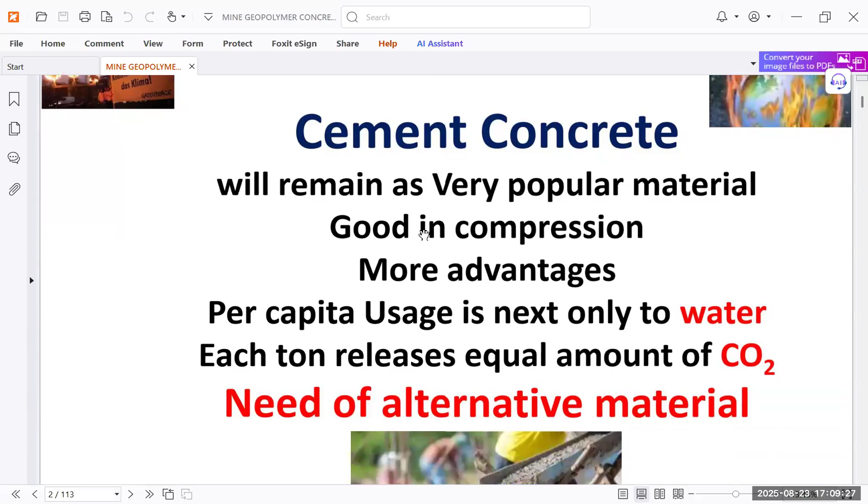You can see the CO2 amount being released is very high in this usage. After China, India is the second largest CO2 emitter during cement concrete production.

So that is the reason an alternative material is needed, because CO2 is not good for our environment. This research is going on to compensate by reducing the use of environmental sources so that we make less emission of CO2. That is the purpose of this research.

Portland cement is commonly used in this. It is most energy intensive and consumes 4 gigajoules per ton of energy, and its major ingredients go into concrete, and it has less shelf life.

That is why we are going to cementitious materials, because cement production generates a lot of CO2. That is why we are moving towards cementitious materials.

Some materials already known to have cementitious properties include industrial waste, among others. Disposing of waste is also an issue nowadays because it is not easily disposable, so its disposal is a challenge. That is why it is important to consider waste during the construction process, so that the disposal issue is solved.

We can use the industrial waste, and that is why it is important. We should focus on how we can use industrial waste and how we can combat the challenge of emitting large amounts of CO2.

These are the important things. That is the reason why we are going for this research work, and this is the requirement of the time: industrial waste should be properly disposed of, so that the disposal problem is solved and their use is also there.

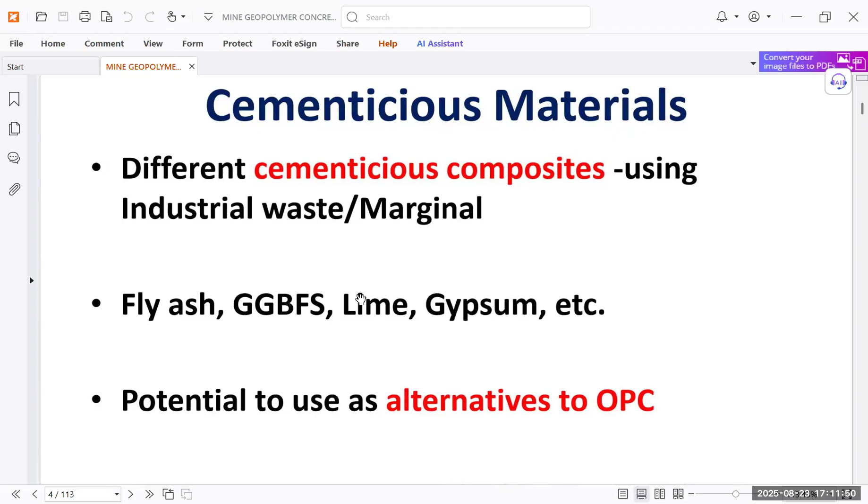That is why we are now moving to alternatives to OPC. OPC is still widely used, but we are coming to alternatives so that our CO2 release is less, and there is also one more thing we have to move towards: the potential use of alternatives to OPC.

We are using that in construction. The best way to dispose of it is that we should use OPC cement partly, but also other cementitious materials, so that the disposal problem is solved and the CO2 emission problem is also solved.

That is the reason CO2 footprints, carbon footprints, need to be reduced as per our government's agenda and as per the agenda for our environment. This topic is more applicable nowadays because it is a concern not only for nature but also for the waste disposal problem.

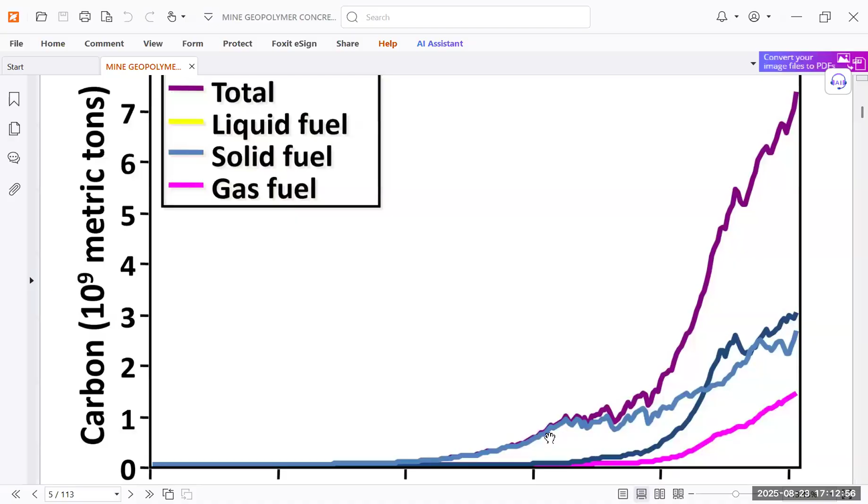You can see there are worldwide carbon emissions, shown as carbon in units of 10 to power 9 metric tons. The total is shown in this graph, along with liquid fuel, solid fuel and gas fuel as different sources of carbon emission, shown year-wise. So we can see the carbon emission is very high due to these emissions.

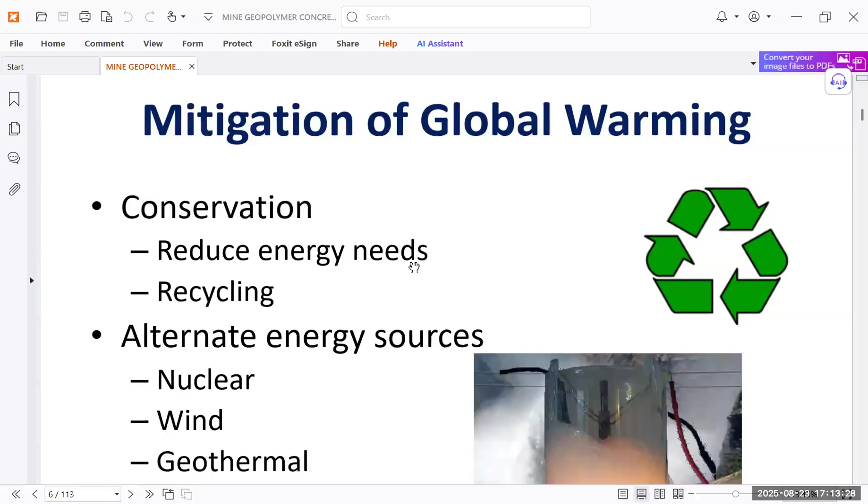So mitigation of global warming is required because the environment is depleting day by day. Conservation is required, and we also have to reduce energy needs and focus on recycling. Earlier we were just going for a one-way cycle; nowadays it is recycling, meaning whatever we use should be recycled rather than disposed of. That is also one main concern, so conservation is one part of why we are focusing on it.

So that energy power is reduced and recycling is there. Earlier, recycling was not there because we were using it and just wasting it and disposing it in waste. Nowadays, its recycling part is also important.

That is why conservation is one thing, and alternative energy sources from which we can produce nuclear also, wind also, geothermal also, hydroelectric also, solar also, fusion also. These are the alternative energy sources by which we can make use of that, so that our CO2 emission part is less and we can use this also as a part of our construction work.

So how is it possible in the construction industry? Because construction industry is a very big industry, and nowadays government is highly focused on the construction industry part. Things are becoming more challenging nowadays because of CO2. If you go for construction, cement is a very essential part, and we have to produce more to meet the requirements of the construction industry.

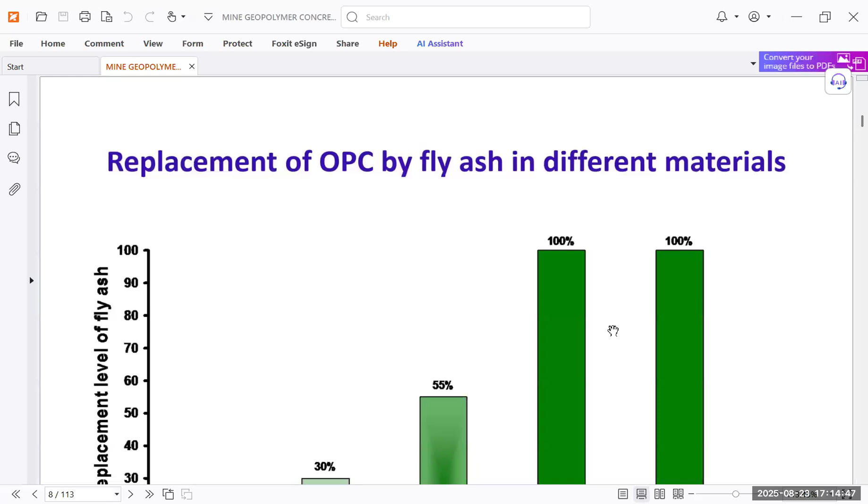That is why we have to focus on this. So that is the reason we are here, to see how these things can be solved by geopolymer concrete. Replacement of OPC by fly ash - already we have seen these different cementitious blends, and this is a normal percent level of the fly ash.

If we use this fly ash percentage, OPC is 0, so then it is required. This means we can say that by this percentage, geopolymer is 100% - 100% replacement is there by geopolymer. So with geopolymer, we can use 100% replacement.

You can see the OPC, there is normal blended cement - not used. We are replacing by 30%, high volume fly ash concrete 55%, FPLG by 100%, and geopolymer also 100%. So we want to replace this CO2 emission part 100% by using geopolymer concrete.

So we should know what is geopolymer. It is activation of natural materials like clay, etc. Geo means it is available in Earth's crust, and polymerization means cementing materials.

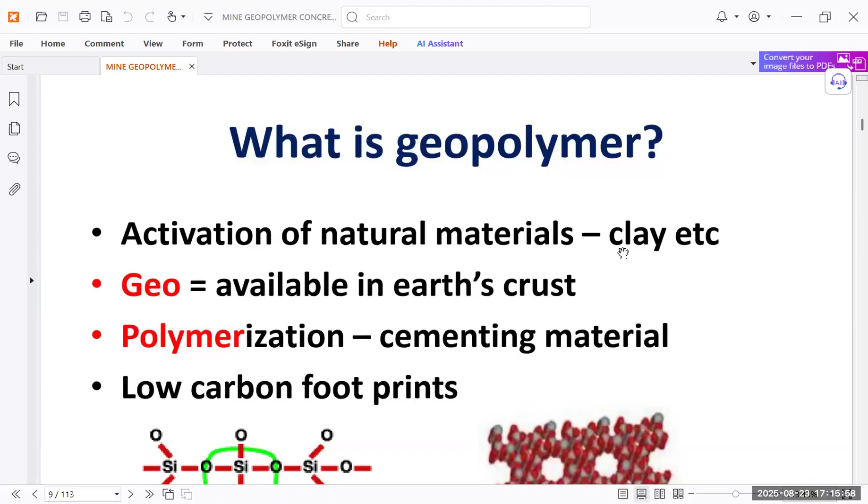So you can see that cement is replaced. Now OPC is not there, and we are using polymerization by using cementing materials. This is why we are going for geopolymer - because it's activation of natural materials like clay, etc., and it is available in the Earth's crust.

That is why it is called geo. And polymerization means cementing materials, with low carbon footprint there. As we are replacing this OPC part, its carbon footprint is less. So you can see the use, essence and importance of this.

The geopolymer concrete is replacing the OPC part. That is why it is also causing less pollution by using cementing materials. So that is why our cement requirement is less.

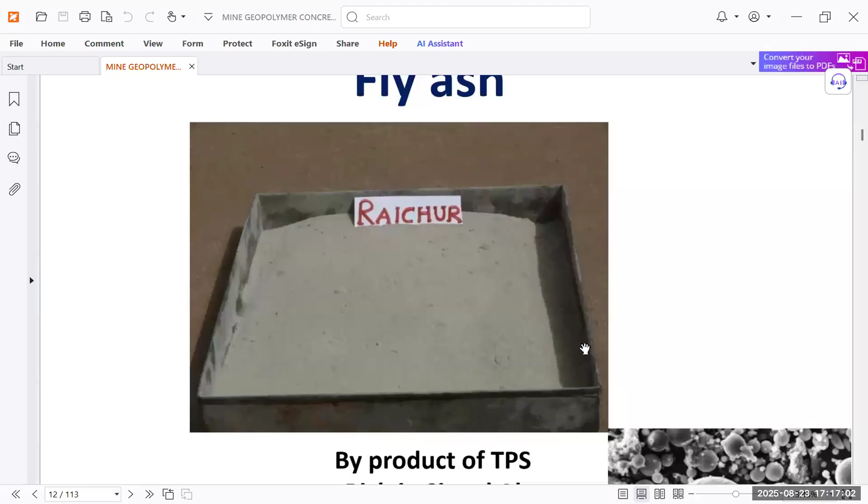These are the parts like cement and fly ash which are nowadays also used in this. Fly ash, as we know, is a by-product of TPS, rich in silica and aluminum, finer than cement, spherical in shape. So this is also one part of this cement.

ASTM classification of fly ash: Class F has calcium less than 5%, it is anthracite coal and not self-cementitious, very common across the world. Class C has calcium greater than 15%, lignite coal, and is self-cementitious, with a lot of commercial value in this C part.

So fly ash, some idea we will have. Before going into geopolymer concrete, we should see that some guidance documents are also there. Fly ash quality assurance by ACI 229R for controlled low strength material. ASTM C311 for sampling and testing fly ash or natural pozzolans for use in Portland cement concrete, given by ASTM. And ASTM C593 is for fly ash and other pozzolans for use with lime.

Which I am showing are the current practices. After that, we'll see what changes will be there after the geopolymer complete industrial cycle.

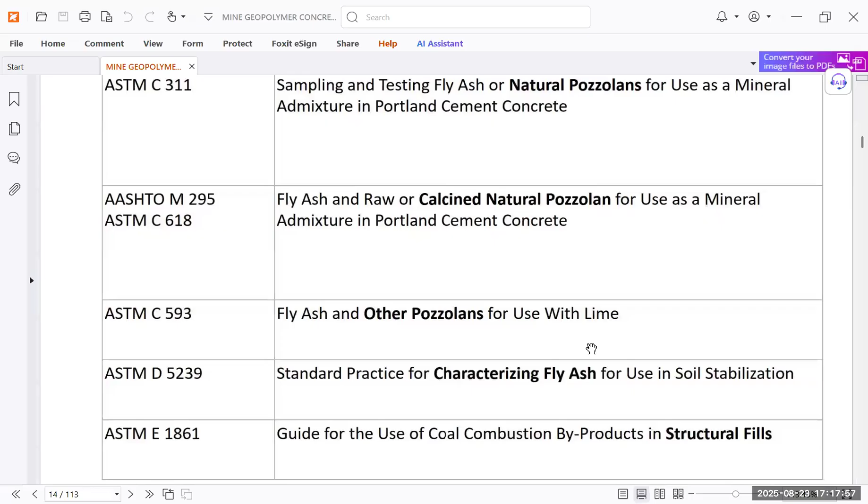There are guidelines for use of coal combustion byproducts in structural fills. This is the slag, also one alternative synthetic material which we go for. And this is GGBS, the waste from the ferrous industry which is quenched ground granulate, rich in silica, aluminum, and calcium. This is also one part of the things going on nowadays.

Metakaolin is also one part we are using, which is burnt clay at high temperatures, highly reactive. It contains silica and can replace cement, but it is not economical.

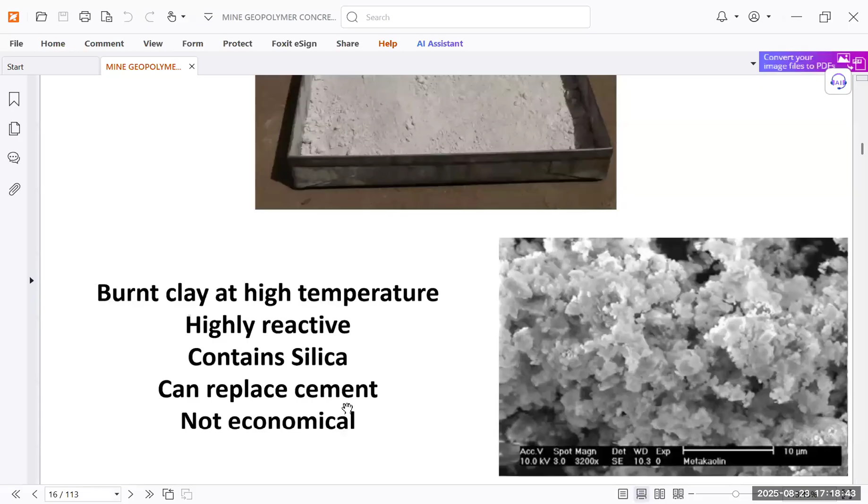We are showing currently what cementitious things we are using, but after that, geopolymer is also not very much costly and it is replacing in a more effective way. These are the current practices going on nowadays.

Silica fume is also used in construction. It has greater than 90% silica, is finer than fly ash, with 1 micron size. Its condensed form can also replace cement.

So these are all the things we already know with similar use. Now let us go for what is the ingredients of the geopolymer concrete.

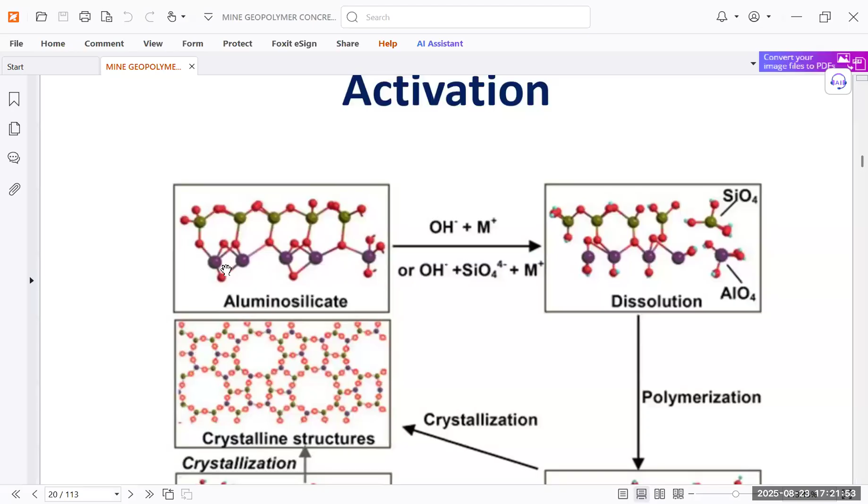Earlier there were cement properties, but now it is geopolymeric reactions, something like this: polymerization occurs, oligomers are made, crystallization occurs and crystalline structures are made, polymerization continues, then amorphous polymers are made. This is the way.

So then why is water used here? Because in OPC cement, we use a water and cement mixture, and exothermic reactions go on. But water is still used here in geopolymer. Water here is used from the alkaline solution, it is used for making the alkaline solution, and it is released during geopolymerization, not used for curing.

So you can see geopolymer concrete is not only reducing the cement content, but also reducing the use of water, because curing is a very important part, as we already know. But in this, water is not used for curing, it is used just to make alkaline solution, and it is released during geopolymerization.

So that is the need of the time. Water should be less, and curing should be less, because water is very less, especially in Delhi. It is an important consideration in some regions where, all over India, water is going down and getting polluted. So water requirement is also reduced, and cement requirement is also reduced. That is the reason this research on geopolymer concrete is getting focus.

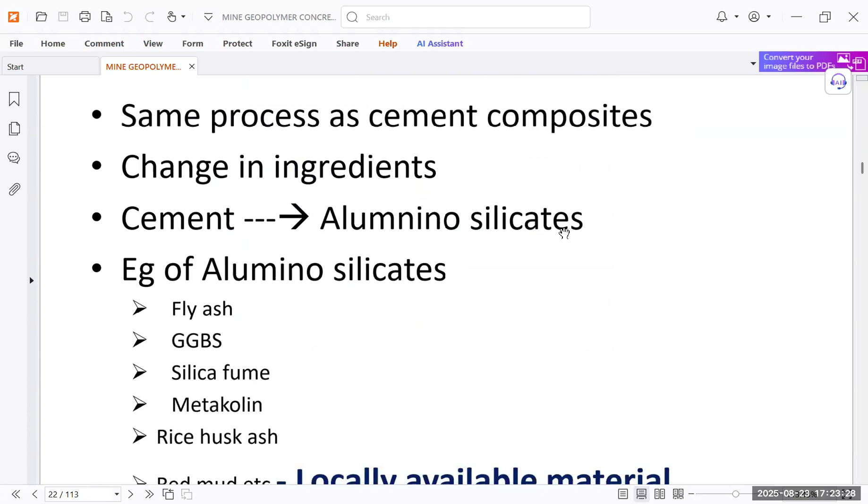Now, how is the making of geopolymer done? Its making is same as cement composites, but the change is in the ingredients. Cement is changed to alumino silicates. Examples of alumino silicates are fly ash, GGBS, silica fume, metakaolin, rice husk ash, and red mud, etc., which are locally available materials. In making geopolymer, we use the same aggregate, and water is used for alkali solution.

We make an 8 to 14 molarity solution. Water is used to make the alkaline solution of 8 to 14 molarity. Sodium hydroxide and sodium silicate are used, and potassium hydroxide and potassium silicate are also used. Then what reaction goes on? Sodium salts plus water are mixed to make the alkaline solution. This is how the reaction goes on in making the geopolymer.

So aggregates are same, but water here is not used for curing purpose. It is used for the alkaline solution, in which we make an 8 to 14 molarity solution. That is why geopolymer is not related only to civil engineers, it is also related to chemistry people, because it involves chemical reactions.

Involving these reactions means we have to do some chemistry too. That is why geopolymer work is also done by chemistry people. Many chemistry people are working in this field, so its availability and understanding is more, because making molar solutions and other things should be done as per requirement. So you can see many chemistry people are also working in this geopolymer concrete, not only civil people, because of these reactions.

After this reaction is done, the process of making is: sodium hydroxide and sodium silicate are there, and from the coal-fired power plant we mix sodium hydroxide and sodium silicate solution to make a highly alkaline solution. From the coal-fired power plant, we get the source material, and we use the aggregates as well.

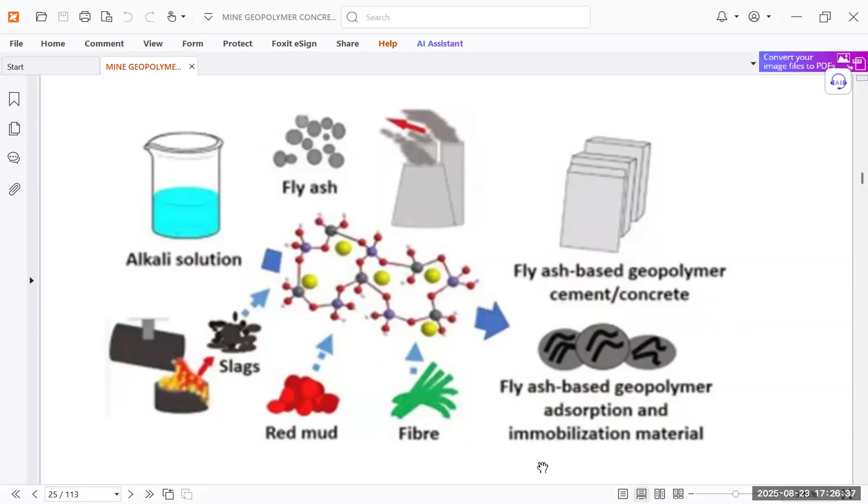You can see that alkali solution is made, the ash we will use, then this geopolymerization occurs, and slags we will use also. Red mud and fiber we will use, and then fly ash based geopolymer cement concrete is made, and fly ash based geopolymer adsorption and immobilization material can be done. After making this, we can use it for different uses in building and other parts. Whatever RCC was used previously, we can similarly use geopolymer concrete.

So this tank is there, as we know, different fly ash is there. When fly ash class F is there, geopolymerization occurs at elevated temperature of 60 degrees Celsius. When GGBS is used, hydration occurs and thermal energy is not required. And if we use fly ash plus GGBS, then geopolymerization plus hydration is there, and thermal energy also is not required.

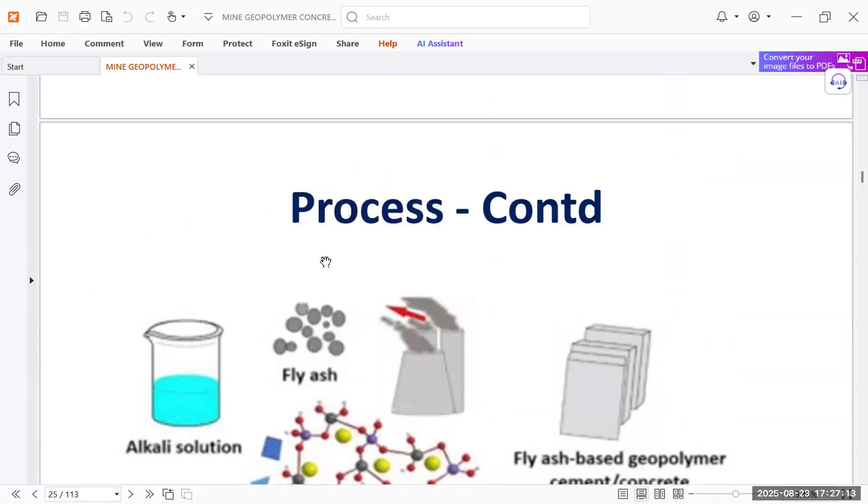As per this, whatever product and extra product we are using, the coal fired power plant is the source material, but this source material is changing to fly ash class F. If the source material is GGBS, thermal energy is not required. If we are using source material fly ash class F, then at elevated temperature such geopolymerization occurs. And when we use source materials fly ash plus GGBS, then geopolymerization plus hydration is there, and thermal energy is not required in that case.

So these are the parts of this geopolymer concrete, we have to make some solutions. What molarity we are making of the solution, that we know molar solutions are there - that's very important. Molarity in this case, the concentration of alkaline solution we have to see. For NaOH, it will be 40 gram per mole, and 1 liter of water plus 40 gram of NaOH is one molarity. This is the definition of one molarity. So that is why chemistry, in which we have read all about what is molar solution, what is molarity, that also comes into picture.

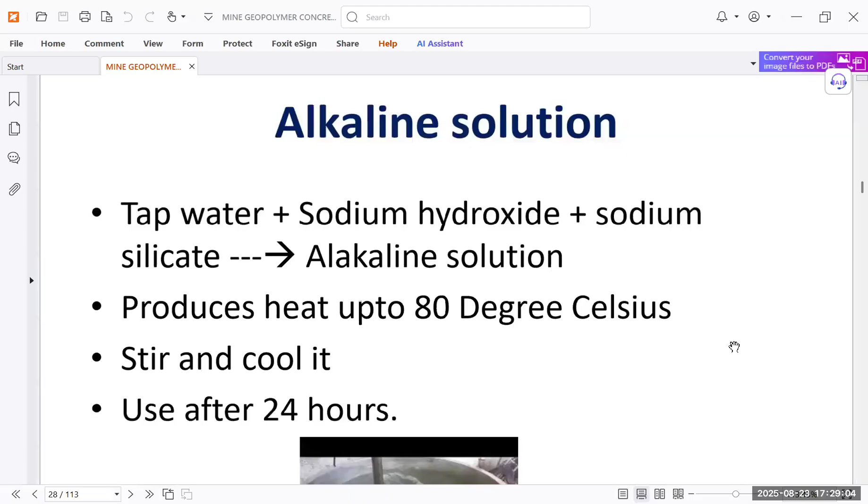To make this alkaline solution, you will use tap water plus sodium hydroxide, because you can see this alkaline solution we are using here. This alkaline solution we are making in the lab. That is why I am showing you how this alkaline solution is made - the molar reactions and other parts - so that alkaline solution making is seen in the lab. You can see this alkaline solution.

So that's why alkaline solutions we are making in the lab. Tap water will be used with sodium hydroxide plus sodium silicate that has been formed here. Sodium silicate has been formed here. Then we will make this alkaline solution, and then we will heat it up to 80 degrees Celsius. Then we will stir it and cool it, and we will use it after 24 hours. This is the way this alkaline solution is made by using tap water plus sodium hydroxide plus sodium silicate - heat up to 80 degrees Celsius, stir it, cool it, and use it after 24 hours.

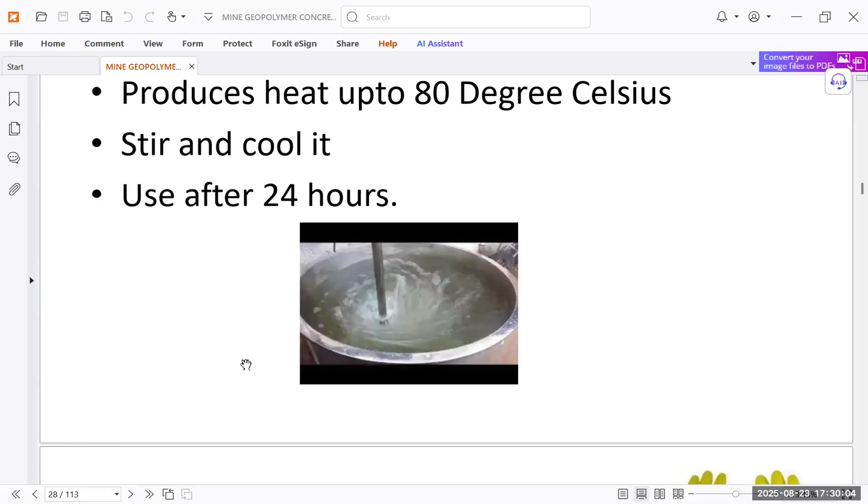But as you know, these are chemistry labs - I think everyone has worked in a chemistry lab. There must be precautions because we are using chemicals. That is why we should have precautions. The solution is highly alkaline plus hot at early hours, and it is not to be touched with bare hands - gloves should be used. So this geopolymer concrete requires some expertise also. It means not every layman can do it.

That is why some background should be there, not to touch with bare hands. Use protective measures, as we know in chemistry lab some protective measures should be taken care of. If it falls on skin, then loss of skin is also there, and it takes long time for healing if something occurs. So avoid falling of solution on skin, ear, and eye, etc. These are the precautions when we are making this lab.

That is why I told you, because chemistry people already work there. So those safety precautions we take in chemistry lab, same here also took in place.

Highly alkaline plus hot at early hours it is there, so that is why not to touch with bare hands. Use protective measures. If it falls on skin, loss of skin can also be there, and takes long time for healing. Avoid falling of solution on skin, ear, and eye, etc. These are the precautions we have to make using this molar solution.

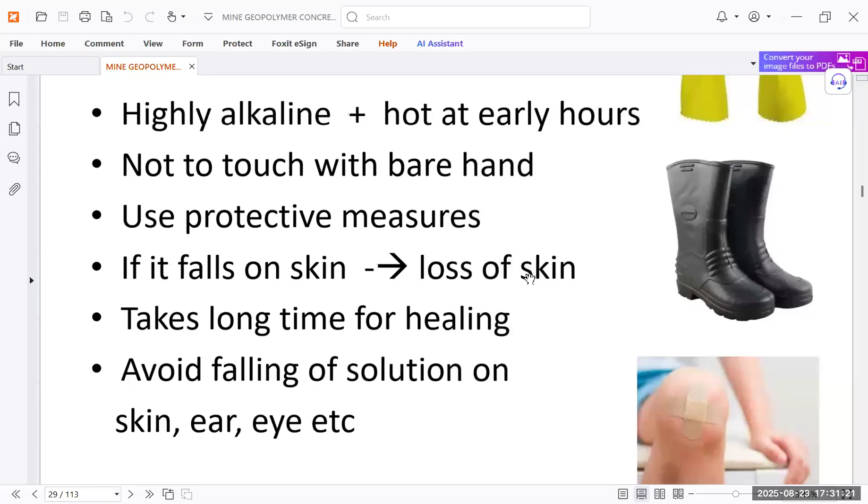If it is there, then we have to immediately splash jet of water on the affected area continuously, and irritation stops in minutes. If problem persists, then we have to consult doctor. And many researchers hide this information.

Because geopolymer concrete we are working on, we should know that these issues can also be there if we are not taking precaution. That is why we have to be cautious while making this. If eye problem is there, then we have to immediately wash the eye with clear water, consult doctor, and do not delay. These are the precautions because it concerns our health.

This also we should know, that with geopolymer concrete these parts will also be there. We should be ready for this, and whatever things are required for precaution we have to take care of, we can use protective glasses also.

There are some challenges also, as you know the geopolymer concrete code is not there. Like IS 456 code is there, but for geopolymer it is not there. Maybe we are in the process of making the draft of that code, but still it is not there. So there are some challenges also.

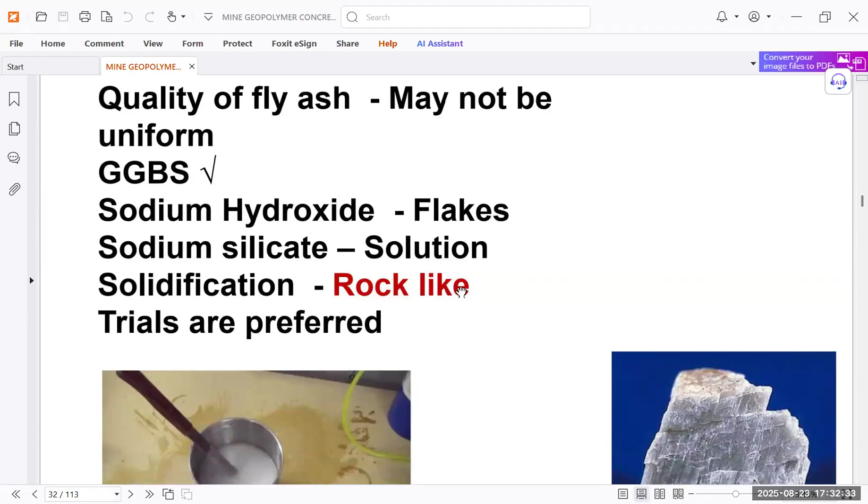What is the quality of fly ash where you are using, that may not be uniform, and GGBS also, and sodium hydroxide - some may be having flakes - and sodium silicate solution that we have to make properly. Solidification also rock-like occurs, and trials are preferred.

These are the challenges we have to see: quality of fly ash may not be uniform, GGBS and sodium hydroxide flakes are there, sodium silicate solution making is also a challenge, and solidification rock-like this is also there. Trials are preferred before finalizing the solution.

Geopolymers are something like this. When we make this, you can see Na2SiO3 plus NaOH solution there. This will be used to make alkaline solution, and fly ash also we will take from here. Alkaline solution plus fly ash we will mix, then we get the mix design, and fresh GPC will be made.

This fresh geopolymer concrete will be used for making cubes and reinforced GPC beams also. These are the ways by which we can produce geopolymer concrete, and we can use it in RCC beams also - these will be called reinforced GPC beams because we are using geopolymer concrete in them.

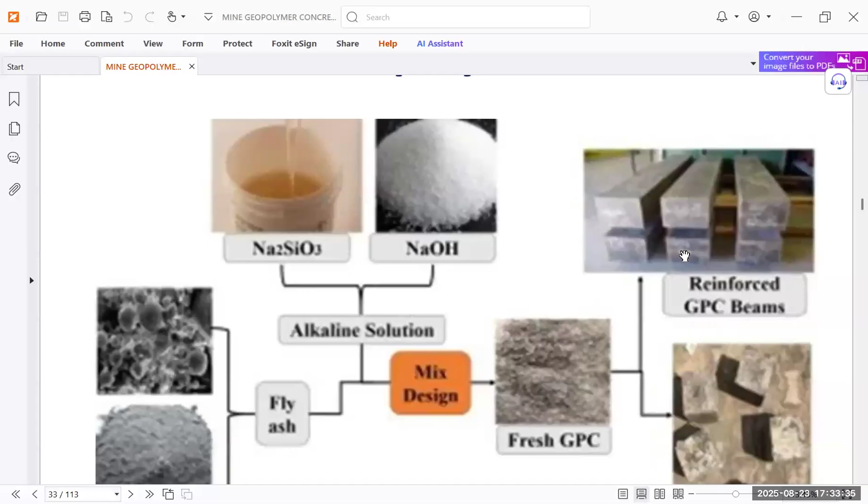Okay, and similarly geopolymer cubes are made here, something like this. These are the things by which we go for the geopolymer concrete.

So what about the water cement ratio? Here water cement is not used, instead of water we are using fluid. These are the changes we get in geopolymer concrete because water is not there. We are replacing water by fluid because we are making a solution, and cement we are replacing by binder. This is the change which we are doing.

So in geopolymer, cement is replaced by binder and water is replaced by fluid. Use of water is also less, and cement is replaced by binder, then cement is also not used here. That is the requirement of the day - CO2 production is very less, use of water is also very less during curing. That is the reason water cement ratio will be replaced here by fluid to binder ratio. That is the important thing.

Here water cement ratio will not be there because neither are we using pure water nor pure cement. So it will not be water cement ratio, it will be fluid binder ratio in this case.

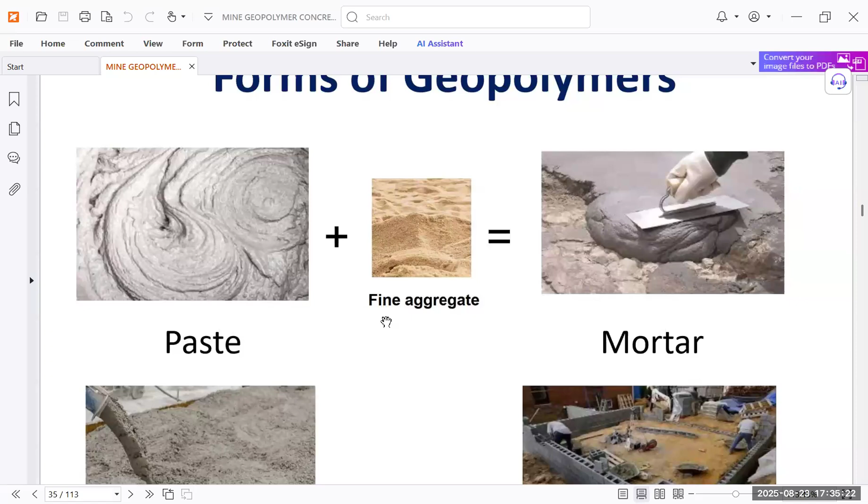These are the forms of the geopolymer. You can see the paste, then fine aggregates, then mortar is made, and concrete with machinery. This is what we are making using these forms of geopolymer. It can be made into any shape, similar to RCC, molded into any form. You can see cement paste, concrete, machinery, and mortar being made - these are the forms of geopolymer.

Geopolymer paste is made using fly ash plus GGBS, ground granulated blast furnace slag, as the source material, with alkaline solution. This makes the geopolymer paste. You can see cement is not there in this paste - that is missing here. That is the change we have made in geopolymer concrete, so our CO2 requirement is less and carbon footprint is less. That is there in this geopolymer concrete paste.

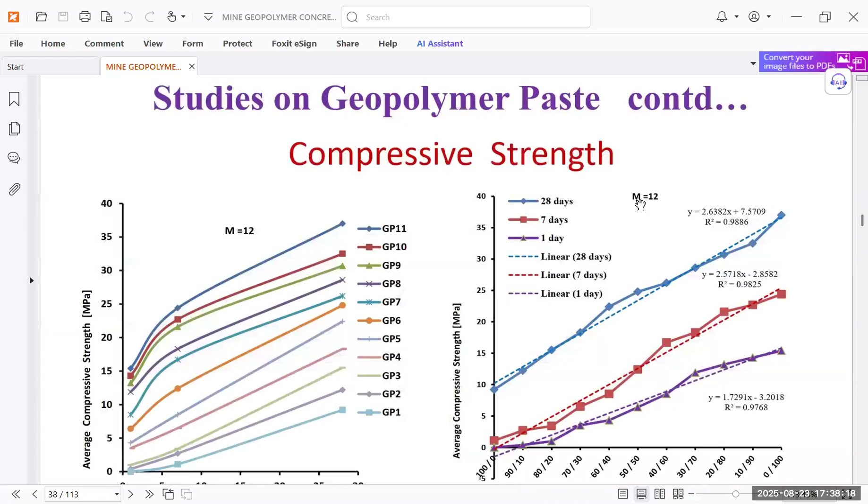Studies on geopolymer concrete paste have been done. You can see these graphs plotted for different geopolymer concrete GP1 to GP11, showing compressive strength. This is for molarity 12 throughout. As per age it progresses, and different colors show GP1 to GP11 - blue is for GP11, and another color for GP10, showing the average compressive strength at different ages.

For GP10, we used a 10 to 90 ratio - fly ash is 10% and GGBS is 90%. This GGBS waste is also used from those plants, which is also covered in this case. You can see how the strength changes with different molarity for different geopolymer concrete having different fly ash to GGBS ratios.

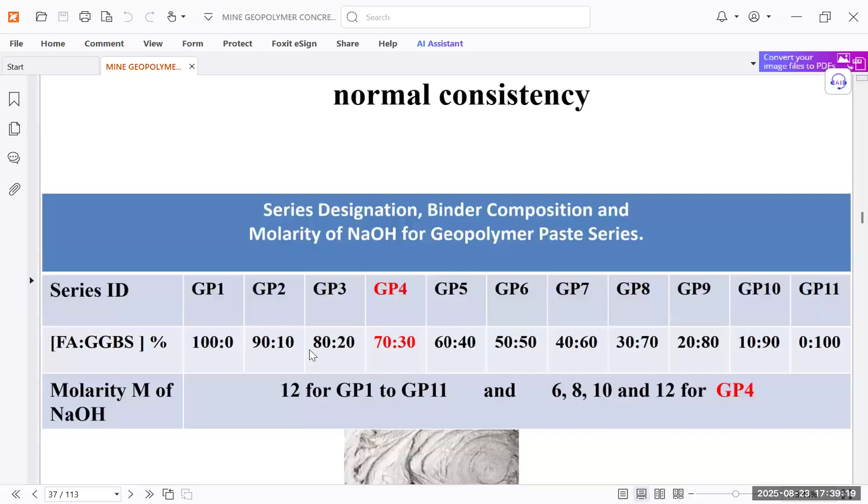As per the strength for different days, after 28 days strength, for this fixed molarity of 12, the change in the graph has been plotted, so we can achieve the required strength by controlling the mixed proportion ratios. As in the RCC case, here also we can get those strengths by adjusting the fly ash to GGBS ratio, so we have seen that we can achieve similar results using this geopolymer concrete.

In this case, microstructure views have been shown. The 3 day strength is 3.3 megapascal, and we have taken these pictures at the micro level. The 7 day strength is 6.4 megapascal, and after 28 days the strength is 20.4 megapascal. You can see how the strength progresses over different days, as in the case of RCC also.

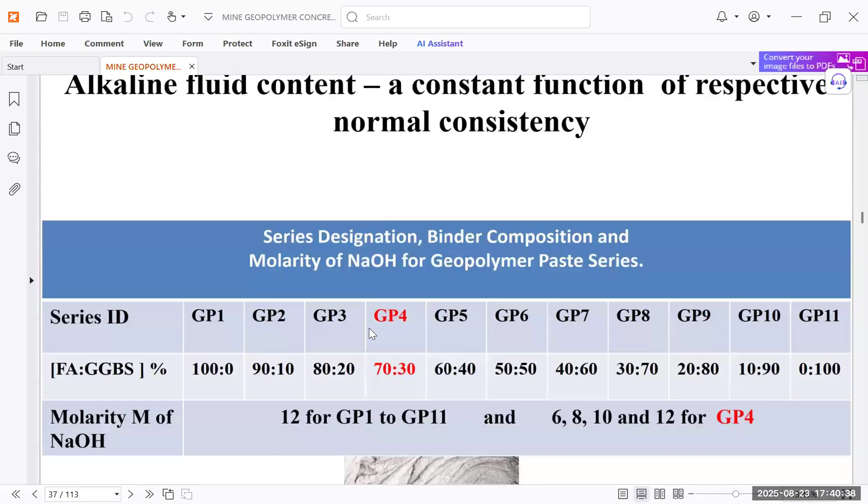So by this we can understand that geopolymer concrete also produces results similar to that of normal concrete using OPC. But here cement is not used, so CO2 production is less, which is why carbon footprints are less, while still achieving the desired strength through this ratio variation.

These are the research parts going on, evolution of microstructure with molarity for GP4. You can see the microstructure with molarity for GP4 for 7 days strength, with different molarities we have tried. For molarity 8, the strength is 4.8 megapascal. You can see the strength varying with molarity.

When fly ash to GGBS ratio is 70 to 30, same ratio, for 7 days strength, but with molarity the strength is changing. That is why we have changed the molarity also in this case. You can see 6, 8, 10, 12 for GP4, and 12 for GP1 to GP11. That is why molarity is also affecting the 3 days strength or 7 days strength.

By controlling the molarity also, we can get different strengths for the same number of days. That is also one part, so as per requirement we can mold different molarities. Whatever strength we want to achieve in 7 days, we can accordingly set the molarity - 6, 8, 10, or 12 - we have tried here.

You can see 7 days strength is 6.5 megapascal, for the same fly ash to GGBS ratio, 70 to 30 ratio. That is the reason why it is also moldable. Like in the previous case water cement ratio was changed, in this case molarity is changed so that we get the desired strength. These are the different research studies we have done.

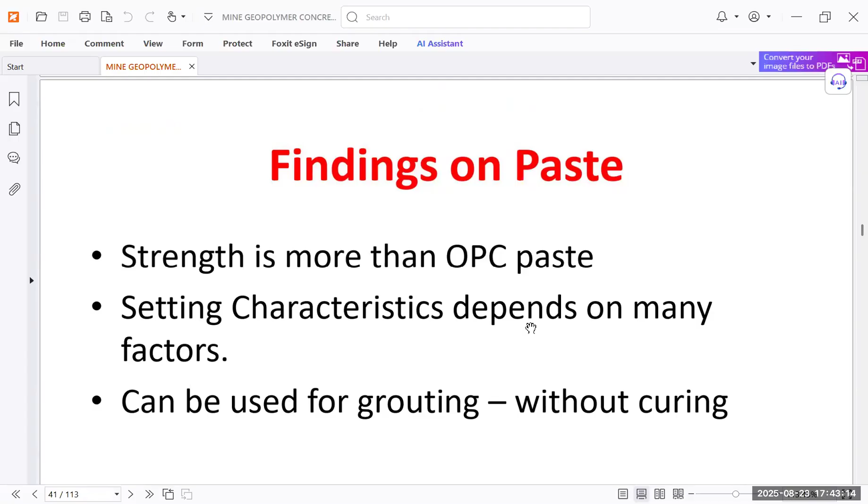For the 0.35 fluid-to-binder ratio, this is called the GMB series, and for 0.2 fluid-to-binder ratio, this is called the GMA series. The molarity M of sodium hydroxide is taken as 14. For this fixed molarity, we can see results for different fluid-to-binder ratios.

In this case, the binder composition is on a fly ash to GGBS basis: 100 to 0, then 90 to 10 - different binder compositions have been taken. Then we assigned series designations and mortar proportions.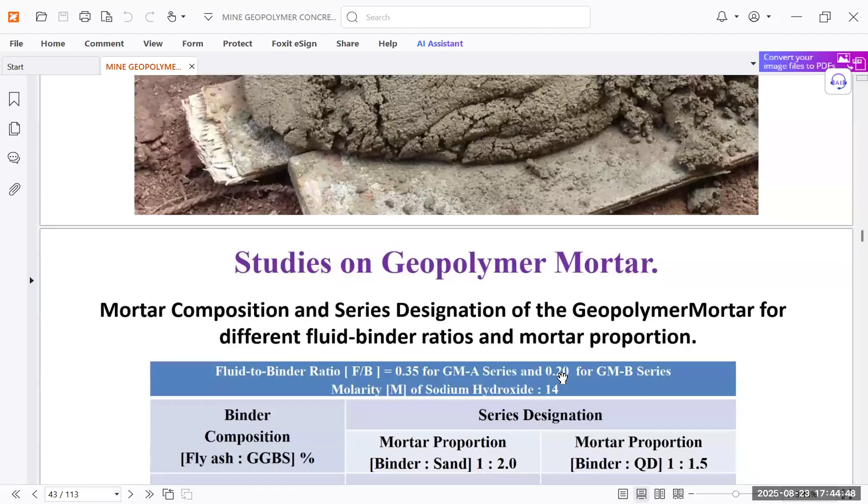So according to that, we have GMA1, GMA2, GMA3, GMA4, up to GMA11. The mortar proportion is 1 ratio to 1.5, and similarly GMB1, GMB2 are taken. The A series is for 0.35 fluid-to-binder ratio and B series is for 0.2 ratio. These are the different series for different binder ratios.

So in this case, we made some definitions and plotted our studies in this graph, studying the geopolymer mortar - the variation of strength with binder composition and age, at a constant flow of 75 plus minus 5%. This is the graph we obtained.

This shows 28 days, 14 days, and 7 days strength. You can see the series we have plotted from GM onward in this graph, showing how the ratio changes with compressive strength after 7, 14, and 28 days. This is how we obtain strength in the different geopolymer ratios.

These are the compositions we have taken - 100, 90, 70, 30, and others. By varying these ratios, we can get the different required strength, similar to different cases of an RCC mix. Geopolymer concrete can give the same type of different results as per the variation of binder-to-cement ratio and the fluid-to-binder ratio.

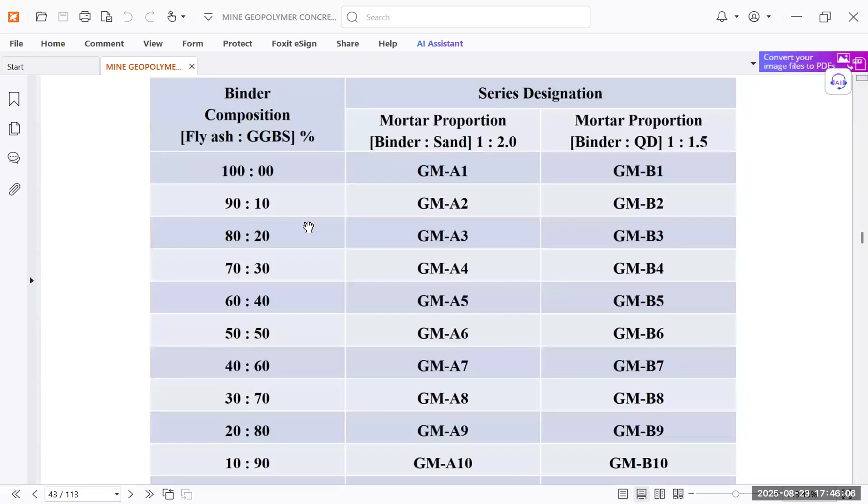I'm just showing how different strengths can also be obtained by varying the fly ash to GGBS ratio, varying the molarity, and varying the fluid-to-binder ratio. The same way, we can get results for geopolymer concrete and geopolymer mortar - this variation of strength with fly ash to GGBS ratio for different ages at different constant flows is obtained in this graph.

This shows that it is also applicable for the other parts. As per the requirement, we can vary the geopolymer mortar ratio to get the required strength.

Further graphs have been plotted for the variation of strength with molarity of NaOH. Now the molarity is changed - 6, 8, 10, 12, 14, 16, 18, 20 - and we can see this variation of strength with molarity.

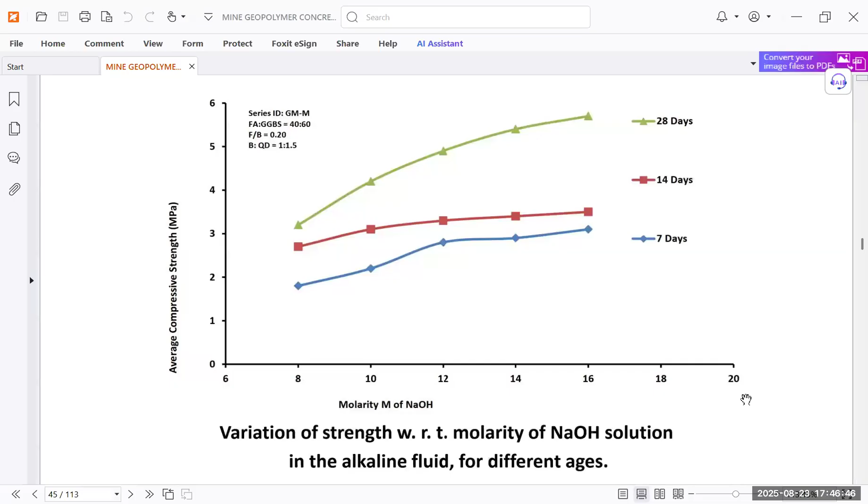As we already discussed in the previous case, molarity changes are shown here too - 12 molarity, 10 molarity, 8 molarity, 6 molarity. By changing the different molarity, we get different strength, and the same way we have plotted this graph.

This shows NaOH molarity plotted for 28 days, 14 days, and 7 days. For these different molarities, we have obtained this graph.

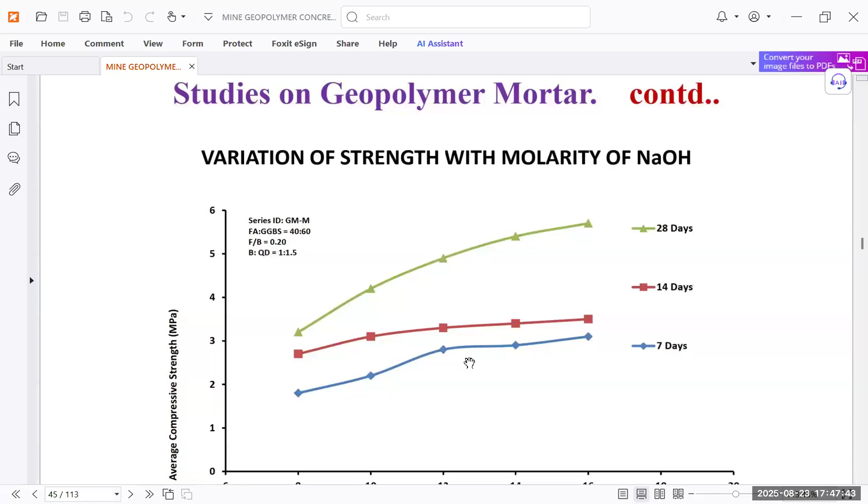Molarity is an important part, as per the requirement of how much strength we require in 28 days. This graph shows that molarity can be correlated with compressive strength - whatever compressive strength is required, by changing the molarity we can achieve it. Different molarities give different strengths for our geopolymer mortar.

Further studies on geopolymer mortar have been done. The variation of strength with mortar proportions has been shown. Mortar composition and series designation of GP mortar for different mortar proportions was carried out.

We made the fly ash to GGBS ratio 40 to 60, with molarity of NaOH at 14 and fluid to binder ratio at 0.4. Different mortar proportions were taken, with binder to QD ratio of 1:1 and 1:1.5, and series designation was carried out. This has also been plotted on a graph.

You can see this graph showing the results.

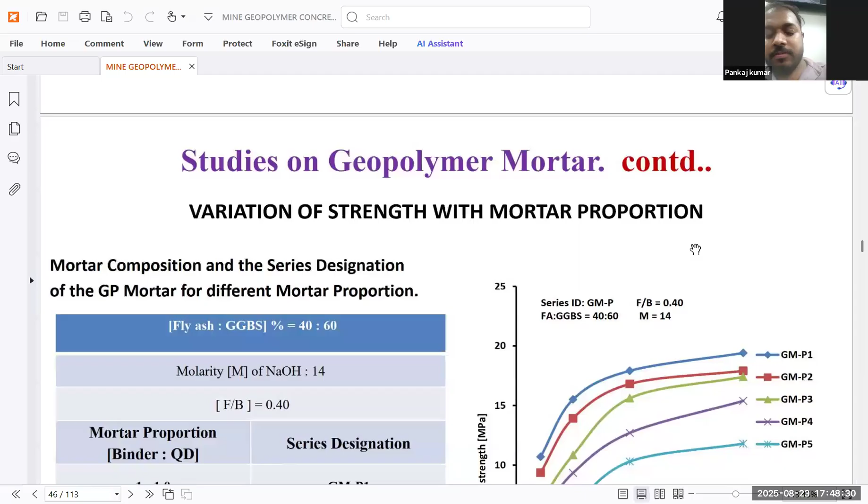After this, we see that molarity is fixed and fluid binder ratio is 0.4, so the average compressive strength is seen by varying the binder to QD ratio we have taken. We plotted this and obtained different strengths for different ages.

So this way, by using different compositions, we can get results similar to RCC concrete. Concrete-like results can be obtained by varying the molarity and varying the binder to fluid ratio. These are the factors by which we can get the required strength and results as in the case of concrete, without using cement.

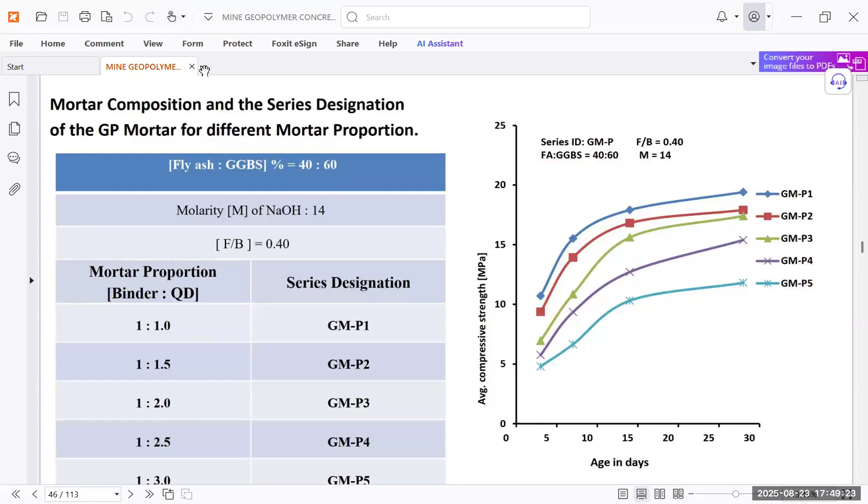That is the research area we are working on, getting results similar to conventional concrete in this geopolymer concrete by changing the molarity and the binder to fluid ratio. So we can get the desired results as in concrete, which is why it is very useful. Without using cement, we are getting those results.

In this case, W by C ratio is 0.3. Geopolymer blocks are manually made using a hydraulic press, with curing conditions done without water.

That is very important—we are doing curing without water. Water is not required. You can see that heat curing and ambient curing are both done without water. Geopolymer blocks are made manually using a hydraulic press, with heat curing or ambient curing.

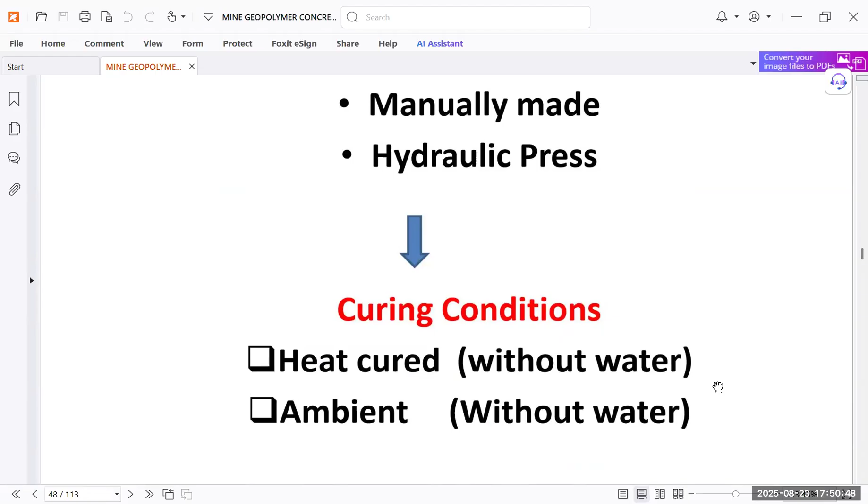In both cases, water is not used. So you can see that water is saved in the case of geopolymer blocks. No water is required during curing, which is why we are saving water and also getting the required results as in the case of concrete. That is why it is important.

That is an important part for the research—we are using different molarity, fluid to binder ratio, and we are not using water. Without curing with water, we are getting the results, which is why it is very important.

But these solutions are made in the lab, so special care is taken. It cannot be made by common persons, so expertise is required in making the required solution.

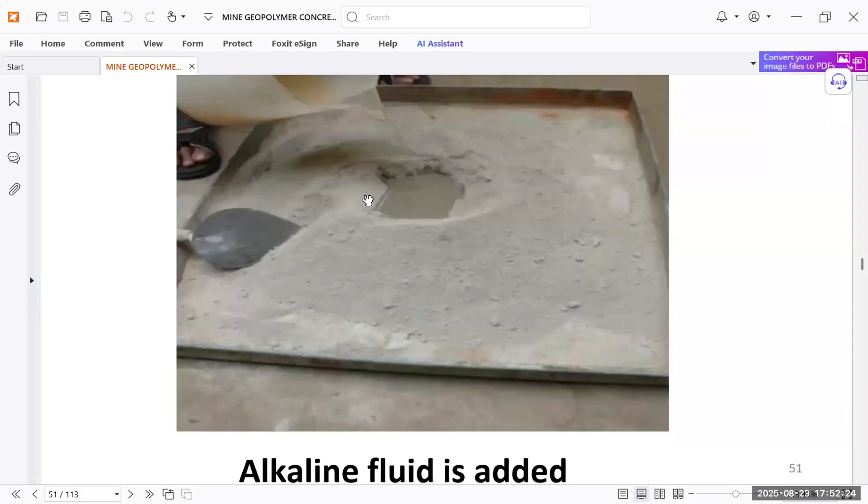Our desired strength is obtained by making proper molar solution, which is very important. So this alkaline fluid is added, not water. This alkaline fluid in the beaker is not water, which is important to know. You can see gloves are used here, not open-handed. We can use gloves because it is dealing with the solution, not water. That is why gloves are important in this case.

Let's see how it is made. Using gloves, we cannot go bare-handed because reactions can take place on your hand. That is why we are using gloves here, and mixing to get the homogeneous mix, as you can see. Again, the same process we are doing: we are weighing, making the required quantity of mortar, weighing in this figure.

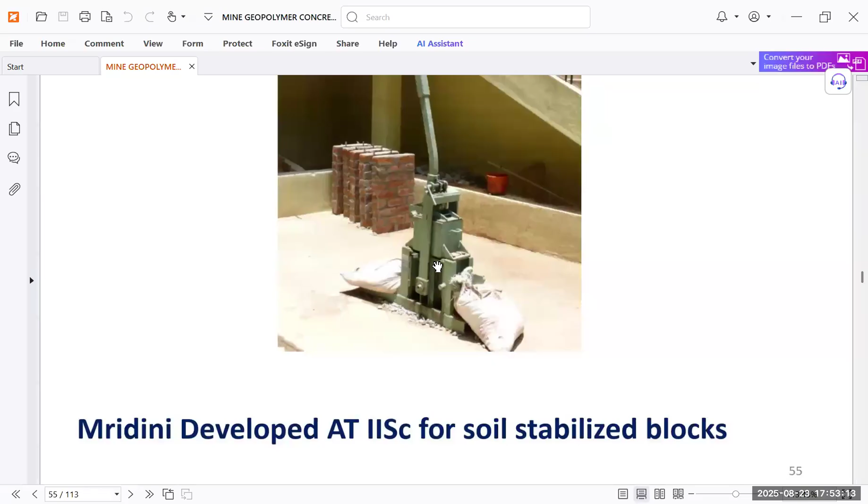Mridini developed at IISc for soil stabilized blocks. So this different maps has been made. At IISc Bangalore, this device has been made for geopolymer concrete. They have made some geopolymer press using a lever manually. These are the instruments for the geopolymer concrete. A mold is lubricated before using it to make the required mold.

These are the things, like we are using this glove. These are to be handled and taken care of by expert people; it is not like anyone can use it. This is how we are doing the research, and this is how we are making it.

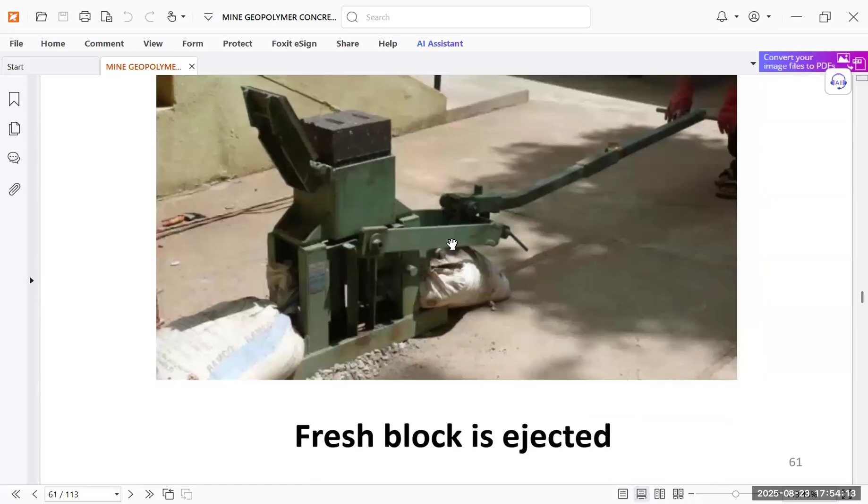This mold is filled with harsh mortar to make the mold. Now this is closed. Then the mold is pressed with a cover plate manually. The fresh block is ejected using this. After this, the height of the block is noted. This is the geopolymer block.

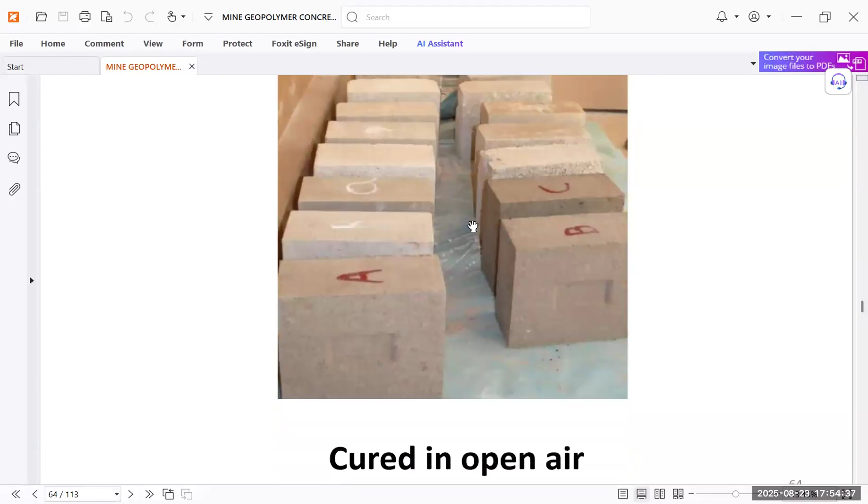Then it is neatly labeled for identification, and it is cured in open air. No curing is done in water; it's cured in open air.

A three-phase system is there in this case. Mortar is made of solids plus liquids plus air. Solids means binders and aggregate. Binders means whatever we are using for the binding part; we are not using cement as a binder here. Liquids here means fluid, because we are using a solution, so the word liquid is replaced by fluid, and air is replaced by the word voids. By using binder plus aggregate plus fluid plus void, we make the mortar in this three-phase system.

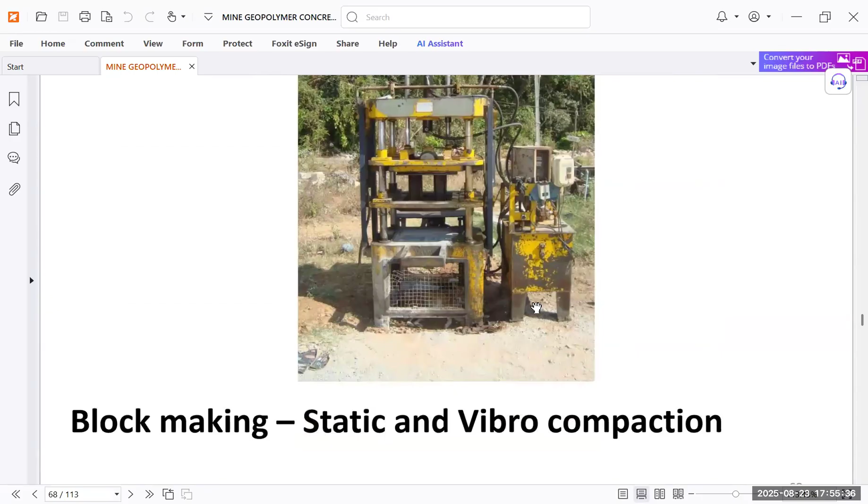That block undergoes static and vibro compaction. It's filled with mortar, again filled with mortar, and then the cover is made like this. A compacting hydraulic machine will compact it, then the block is taken out and cured in open air.

Mass production of the blocks is done, then the blocks go into the field. Similarly, blocks with different shapes and sizes can be made, as with concrete—different sizes like PV1, PV2, PV3 as per requirement. That is the main advantage of concrete, that you can make it in different sizes, and that is also done here in geopolymer.

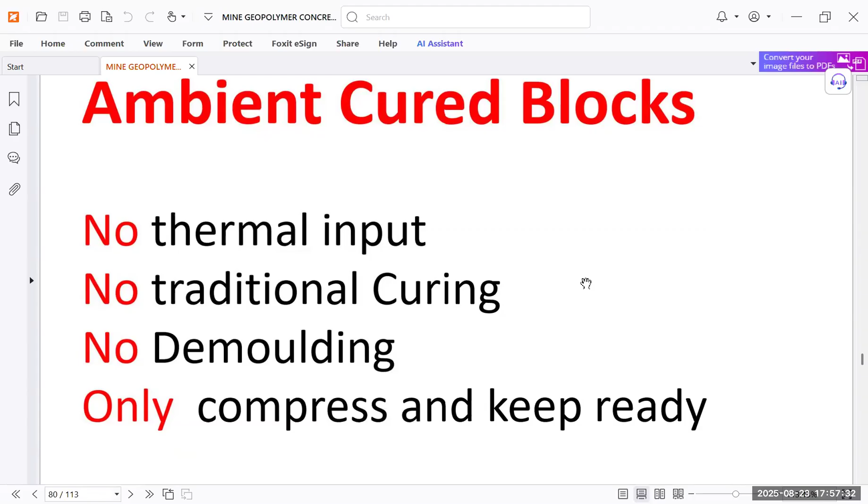The important thing is that these are ambient cured blocks. No thermal input is there, no traditional curing is there, no demolding is there, and only compression keeps it ready. That is the main important part. We are not using any water; we are using ambient cured blocks only. Thermal input is not required, and traditional curing and demolding are also not there. Only compression keeps it ready.

Heat cured geopolymer blocks are also there. In this case, geopolymer blocks can either be ambient cured, meaning cured in open air, or heat cured. The heat curing is done in an oven at the rate of 60 degrees Celsius for 24 hours. We put those blocks in the oven for 24 hours at 60 degrees Celsius to heat cure them, while ambient curing is done in open air. So these two types of curing exist: ambient cure or oven/heat cured, done at 60 degrees Celsius for 24 hours.

Fluid to binder ratio, we already know, because here we are not using water, we are using solution. That is why it is called fluid. And this is why binder, we are not using cement also. So water to cement ratio is now changed to fluid to binder ratio. That is why the terminology here is fluid to binder ratio, not water to cement ratio.

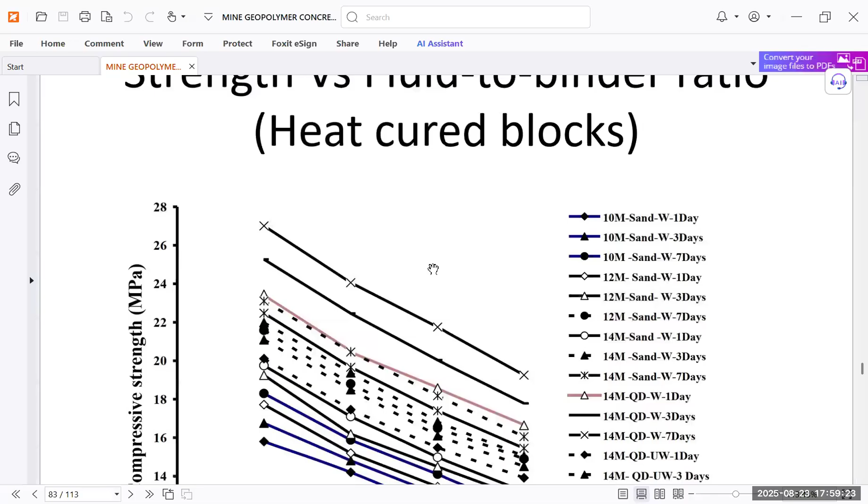Cement concrete which we have done in this case, you can see these results. The strength is changing as per the requirement, and this is the fluid to binder ratio that is being changed. Whatever things we are achieving in concrete, we can achieve here also using the fluid to binder ratio. We are getting those same, similar things which we used to obtain in case of cement concrete, without cement.

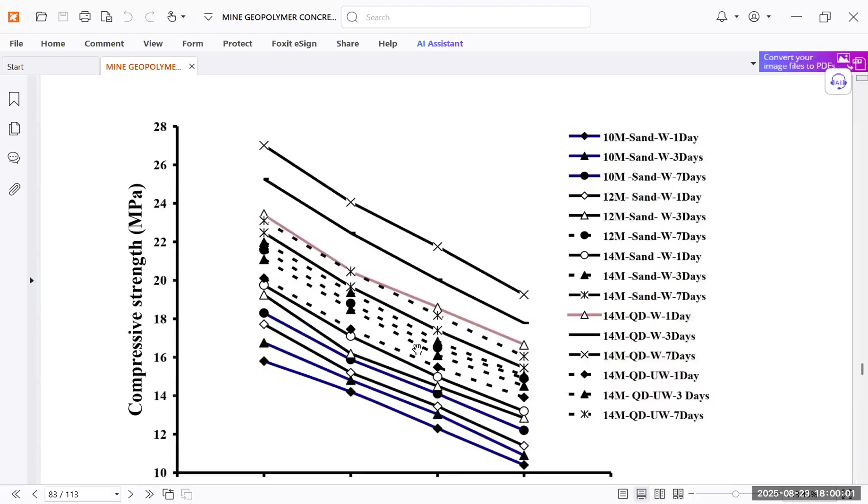That is a very important part, without cement and without water also. So we are not using cement, neither are we focusing on water, but we are using fluid to binder ratio, and we are getting similar results, and different shapes also we are getting. You can see these shapes also we are getting.

That is the important part, why geopolymer concrete is useful nowadays as per the requirement for sustainable construction. Because sustainable construction is there, we are reducing the use of CO2 because we are not producing any cement here, and also we are reducing the use of water. That is why it is sustainable construction, because neither cement is required nor water is required. Both of them are very important in terms of environment, because if more cement is required, then CO2 will be more.

The water is not there, that is why loss of water is also not there, and our use of water will be less. And since construction is going at a higher pace, these things are very important, because if we do not take care of these things, then a lot of CO2 will be produced, which is not very useful for the environment.

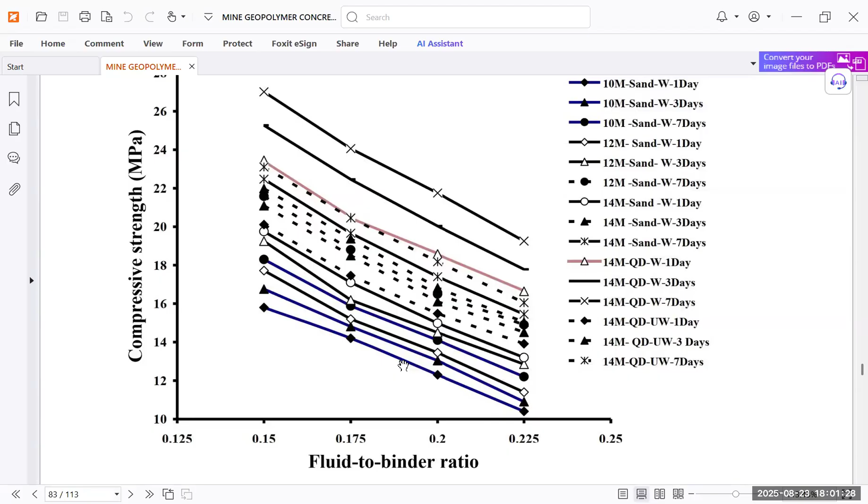Now MBL cured geopolymer blocks are there. In this case, we have done each sample for 1 day, 3 days, 7 days, 14, 28, 56, 90, 120 and 180 days. We have seen these parameters, and fly ash, different fly ash as I told you, FA1, FA2, FA3 we have taken from different sources. And alkaline activator we have to use because we are using solution here, so to make the solution, sodium hydroxide and potassium hydroxide is required.

The ratio of binder to aggregate is there: 1:1, 1:2, 1:3. Degree of saturation is 40 and 60%. Molarity of alkali solution we have changed from 8 molarity. The fine aggregate we are using is from sand, quarry dust, and pond ash. And temperature we are maintaining at 25, 30, 40, 50, 60, 70, 80. And binders we are using here are fly ash, GGBS, silica fume, metakaolin.

Fluid is the solution. Binder is fly ash, GGBS, silica fume, metakaolin. These are the binders. This is variation of temperature, and fine aggregate is sand, quarry dust, and pond ash, which we are using. Molarity of alkaline solutions is 8, 10, 12 molarity.

Molarity solutions have to be made by some expert, which not everyone can make at 8 or 10 molarity. So that has to be taken care of. Whatever requirement is there, that has to be taken care of properly. Otherwise, if the solution is not made properly, desired properties will not be there. That is why for the molarity of the solution we are making, we should take care that if it is required to be 8, it should be 8; if it is 10, it should be 10. Whatever required molarity solution is needed, it has to be made accordingly, otherwise it is very difficult to make the solutions.

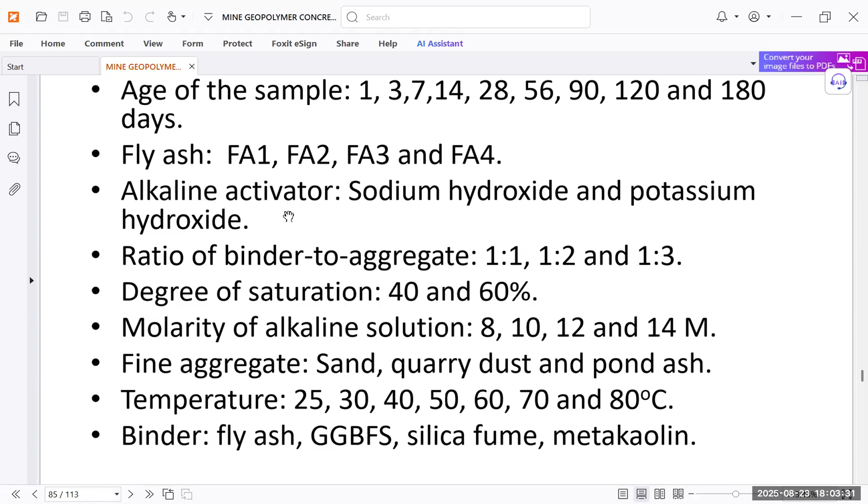The degree of saturation is 40 and 60%. Ratio of binder to aggregate, this has to be maintained. We have varied these things, and we have also varied the binder, like fly ash, GGBS, silica fume and metakaolin. So after that, we have done some study. After this we get the F by B, fluid to binder ratio, 0.2, 0.225, 0.25, 0.275.

And then compressive strength is there. After this, age is seen. You can see that as the age goes on, the strength is increasing. Up to this number of days, we have taken up to 180 days. So we can see that up to 180 days this strength is there. Strength after this is becoming constant.

So we can see the same way a complete graph is coming, and similarly a fluid to binder ratio graph is coming. Similar results are obtained in this case also, and we can achieve those results. That is very important, and that is the reason why this study is relevant for our environment.

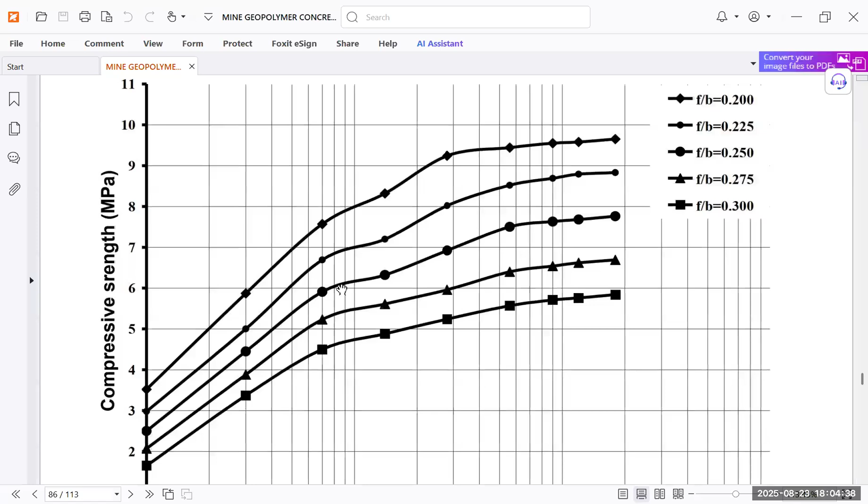These things show that the quality of this result is very important, as it is showing the same graph and same strength as achieved using water and cement also. So without water and cement, we are getting those results.

Strength development with age, we can see for different compositions we have taken, plotted something like this. This is the average compressive strength, against age in days, for different compositions we have taken like BR3, BR2, as per these different compositions with different cementitious material.

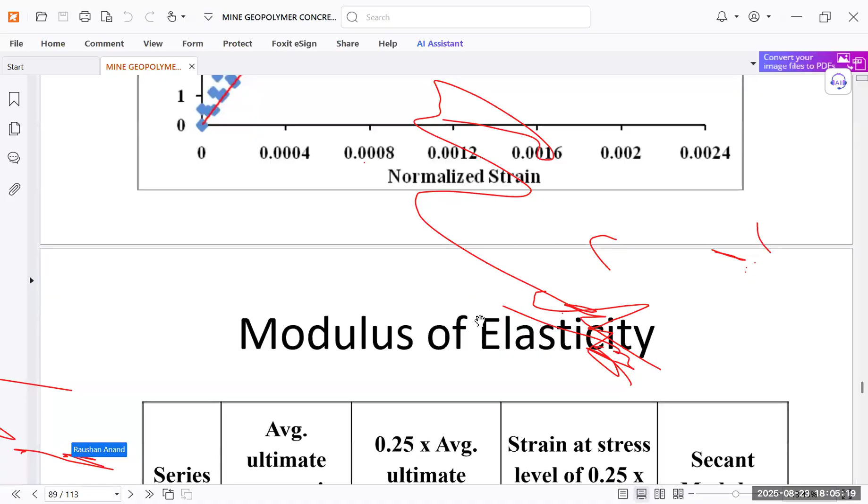Typical stress-strain curve also you can see. This is normalized stress and this is the strain. You can see it is something like that in the geopolymer, and this is the modulus of elasticity.

So you can see the series ID we have given here, and this is the average compressive strength, which is 0.25 into average ultimate strength.

Raushan Anand, I think your marker is going on the screen. Sir, you can remove that person if someone is creating a problem. You are the co-host of this program, sir. Raushan Anand, please do not do it. Who is this person, Raushan Anand? Restrict him completely, what is his name? Raushan Anand.

You can see this series ID, yeah, it is there.

Dear participants, please do not do this. This is the first event like this I have noticed.

Average ultimate compressive strength we have taken care of. This is the average compressive strength, and this is the defined point, and we can see.

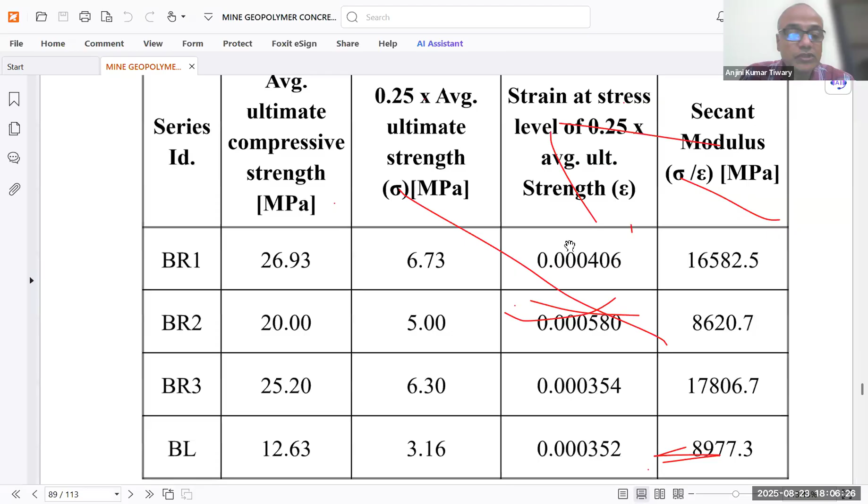I think some child is sitting on his computer. I think, sir, he has been removed from this group.

Secant modulus is there, and weight loss with elevated temperature is there. Then we can see the standard deviation, average weight loss is there, and this is the one.

Then the durability test on the blocks we have seen, then loss of mass and water content as per the ASTM. We can see that loss of mass is 2%, water is 2.4%, for a constant duration of 4 hours. So this is the thing which we can obtain from the model test.

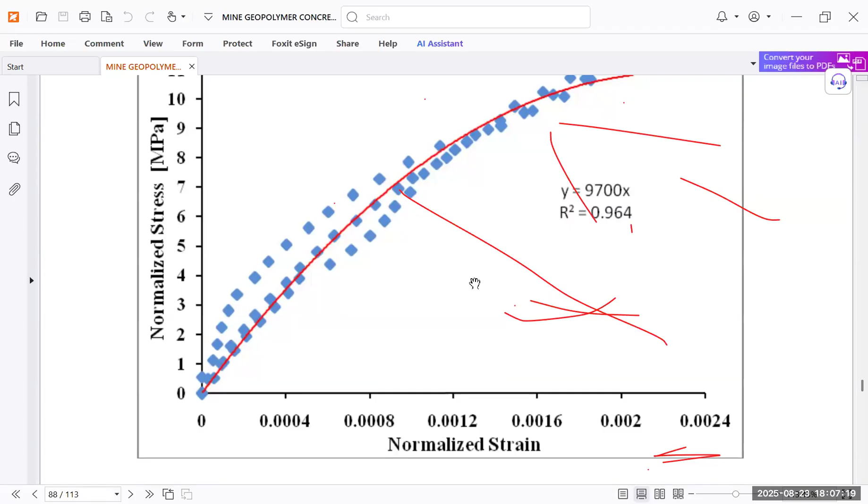You can see this is similar in RCC concrete also, the similar curve is there. So maybe due to this, you can see it is related to something like this, and you can get similar behavior to RCC concrete. Then the durability test on the blocks is also there, and the loss of mass and water content as per ASTM is something like this.

Geopolymer blocks can be used as masonry for bricks, solid blocks, hollow blocks, and wallets. We can see geopolymer brick wallets and the casting of geopolymer brick wallets used in different areas, such as stretcher bonded construction, with geopolymer brick wallets kept for curing. These are prototype models made for the research part.

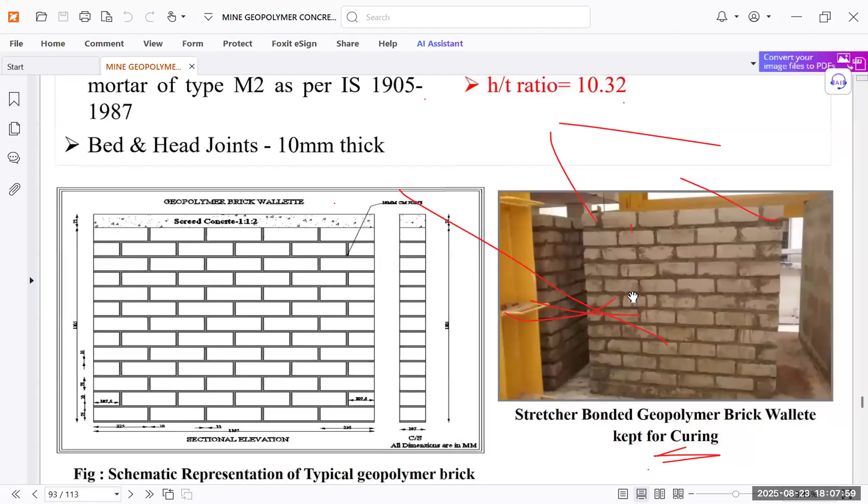Geopolymer solid block wallets are shown, including eccentrically loaded wallets where vertical cracks develop from the bottom. These studies show the failure pattern of axially loaded wallets.

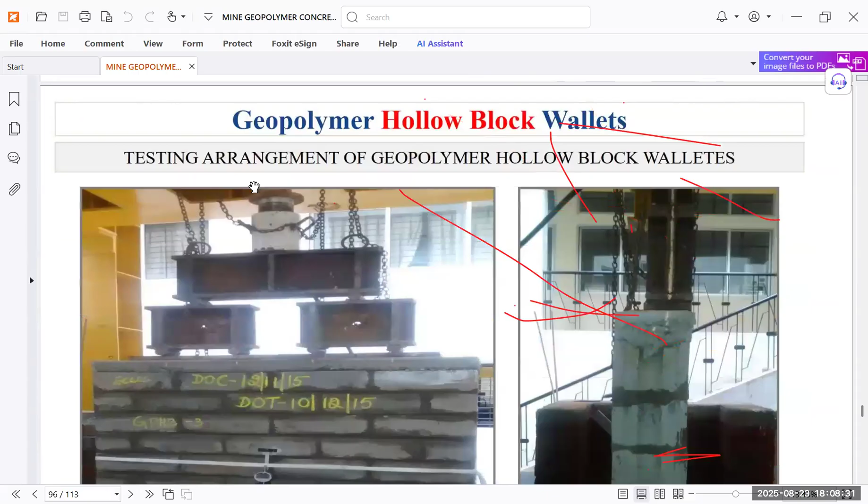Geopolymer hollow block wallets are also tested, with the testing arrangement done for this case as well. We've seen average compressive strength for axial loading and eccentric loading, with the strength of eccentric loaded block wallets being 80%, and 84% for axial loaded wallets.

This data is obtained from pictures of geopolymer structures in the field. This has been tried in some buildings made using geopolymer concrete, and the results are okay as per the requirement. In application, there is no change in the dimension of bricks in the wall.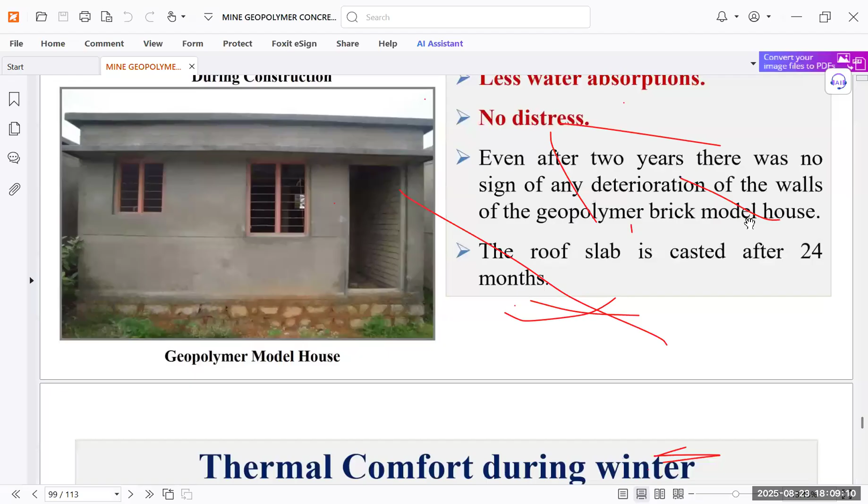Brick edges remain sharp with no erosion. There is less water absorption and no distress. Even after 2 years, there was no sign of any deterioration of the walls of the geopolymer brick model house. The roof slab was cast after 24 months.

This model shows no erosion, no pitting, and less water absorption since water content is also less. No distress is seen, and there is no change in brick dimensions in the walls. The roof slab was also cast after 24 months.

Thermal comfort during winter is also there. You can see the ambient temperature compared to the temperature with GPBS. So thermal comfort is achieved using this geopolymer concrete, which has been made.

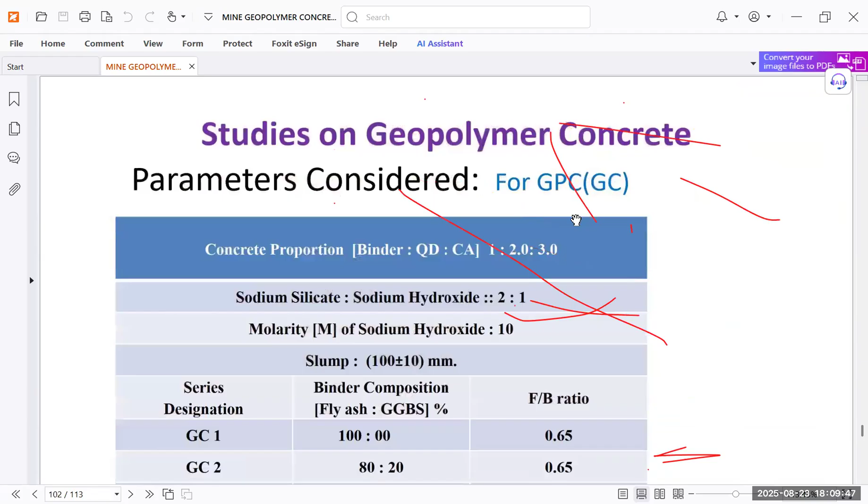These are studies on the geopolymer concrete. The parameters considered are the concrete proportion, binder to quarry dust to coarse aggregate ratio of 1:2:3, and sodium silicate to sodium hydroxide ratio of 2:1, with molarity of 10. We have to take care of the sodium hydroxide ratio and molarity, and the slump is 100 plus or minus 10.

This is the series designation we have made. The binder composition ratio of fly ash to GGBS is varied as 100:0, 80:20, and 60:40. The fluid to binder ratio is varied as 0.65, 0.65, 0.7, 0.75, 0.75, so different fluid to binder ratios are used.

As in the case of cement concrete, we also vary composition using fly ash, GGBS, and fluid to binder ratio to get the desired result. This is important because we are getting results similar to those obtained in case of regular concrete, which is why our research is relevant as per the requirement.

We can see this in the structures after observation made in geopolymer masonry: there is no change in dimension of bricks in the wall, brick edges remain sharp, and there was no erosion, no pitting, and less water absorption. There was no distress even after 2 years, with no sign of deterioration of the walls of the geopolymer brick model house.

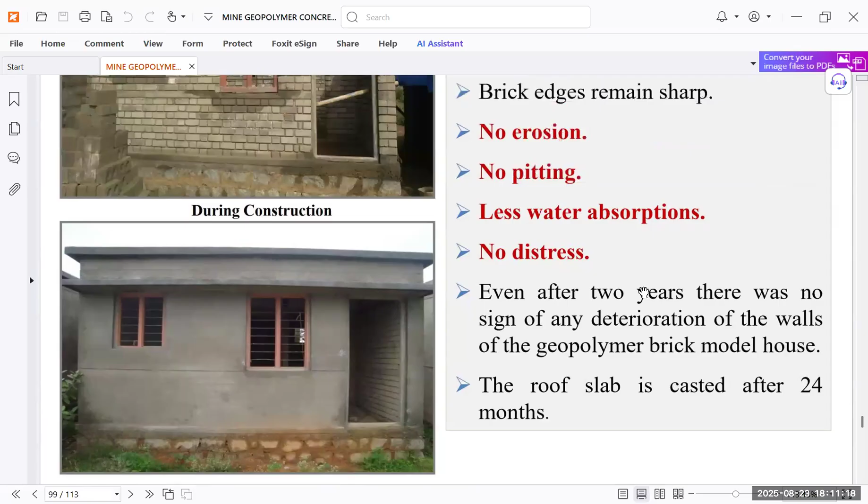The geopolymer brick model house has been tested, and the roof slab was also cast after 24 months. But there was no erosion, no pitting, low water absorption, and no distress using this geopolymer concrete, meaning their practical applicability is very much taken care of.

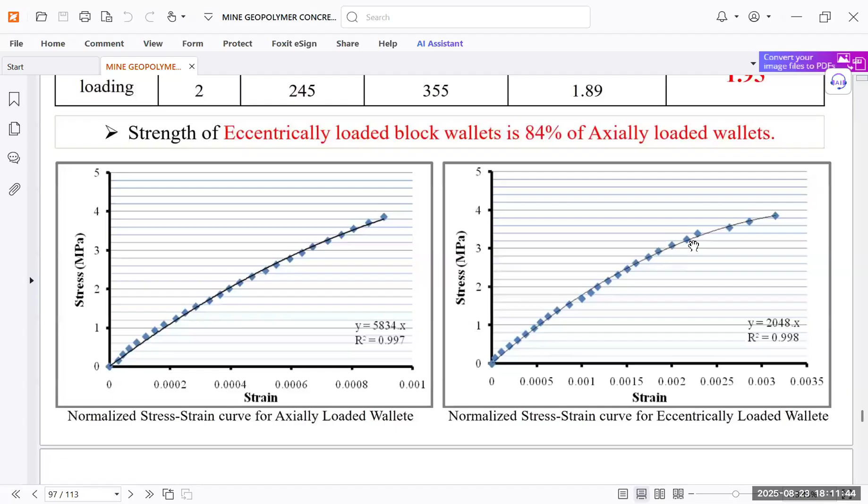So we can go for this. Thermal comfort is also there during winter. Geopolymer concrete making is a useful source in terms of sustainable construction because we are making this sustainable construction without use of cement and without use of water in curing. That is why this is important.

We are making molarity solution. In this case we are not using water also, but different compositions we are changing, like fluid to binder ratio we are changing, fluid fly ash to GGBS. This cementitious material can be GGBS or a different source which we are making. So slump also we are making 100 plus minus 10 mm.

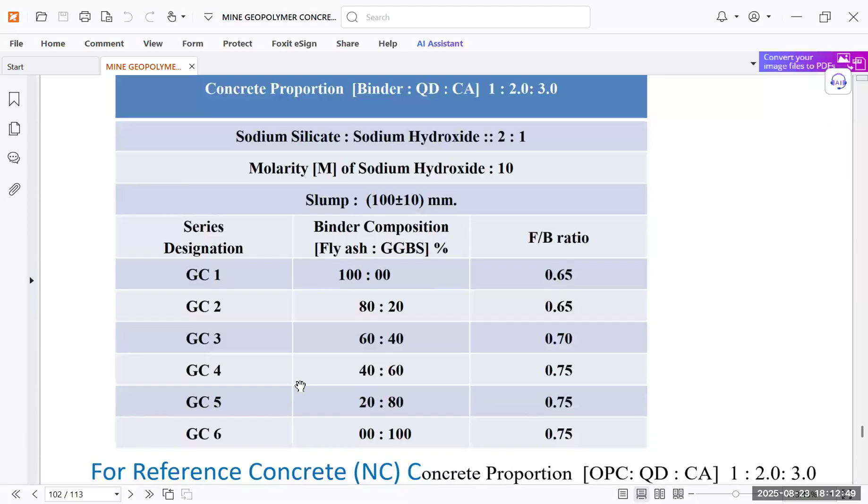And series designation we have taken for different, like for fly ash to GGBS ratio 100 ratio 0. GC1 is there and GC2 is 80 to 20 ratio. So by this we can see that as per the different requirement of the work, we can vary this binder composition and change this fluid to binder ratio so that we can get the desired result.

So mass density for geopolymer concrete is 2424 to 2516 kg per cubic meter, and for normal concrete, as we already know, mass density is 2504 to 2550 kg per cubic meter. And compressive strength we have compared for those, because we are using normal concrete earlier, so that's why we have compared for both.

You can see this compressive strength. This is fly ash to GGBS content, and this is the age in days. This is the variation with respect to age, and this is variation with respect to fly ash to GGBS. This variation we have taken for fly ash to GGBS is something like 80 to 20, for different ratios for mix proportion.

So this is the ratio: fly ash to GGBS is 100 to 0, 80 to 20, instead 40 by 60, 20 by 80, then 0 by 100. So these variations we have taken, and on different ages we are seeing the strength.

And this is the variation with respect to age which we are seeing. The compressive strength we will see in megapascal. So we can see this is NC, normal concrete, and this is GC1, GC2.

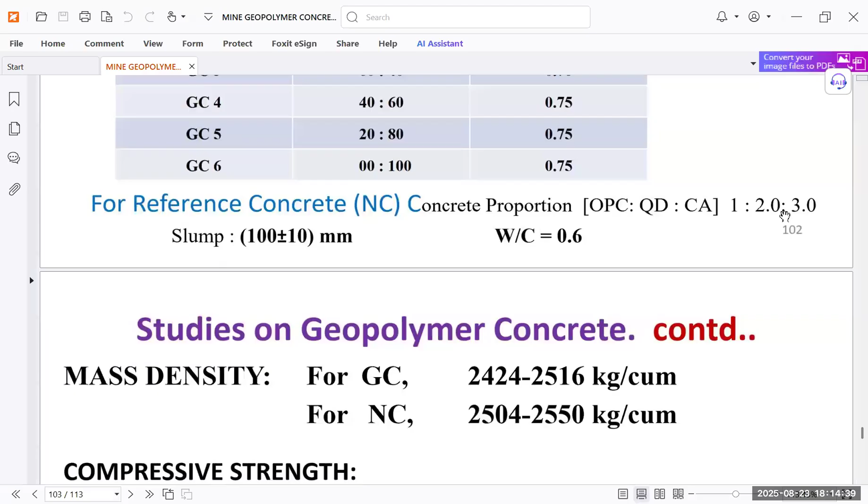Mix proportion is 1 ratio 2 ratio 3. This is the mix proportion, 1 ratio 2 ratio, OPC to CA ratio concrete also here. So this ratio we can see, so we can get the required strength with the ages also.

So we can see that we are getting the required results by comparing with the normal concrete also. We can get the requirement of the result as per our requirement of the work. So it is not only saving, it is not only making the sustainable construction, but also it is making the relevant results in terms of strength.

Means whatever strength we have to make, we can take care of the fluid to binder ratio and molarity ratio, and get the required result as per the requirement of the work. So that tailoring property is there in geopolymer concrete, because of which we can get results as per the requirement. That is why this tailoring property is there, and that is why it is also more popular.

But it requires some expertise to make, because we have to make some molarity solution, and we have to take precautions in the lab while making this molar solution. That is why it is not simple to make — common persons cannot easily make it. They should have some basic knowledge of using these things, because persons have to be trained to make this required solution so that the required things are made. That is important in this case.

So that is the part, that is why it has to be taken care of before making those things. So the variation with respect to age, in this case, you can see by different fly ash to GGBS content.

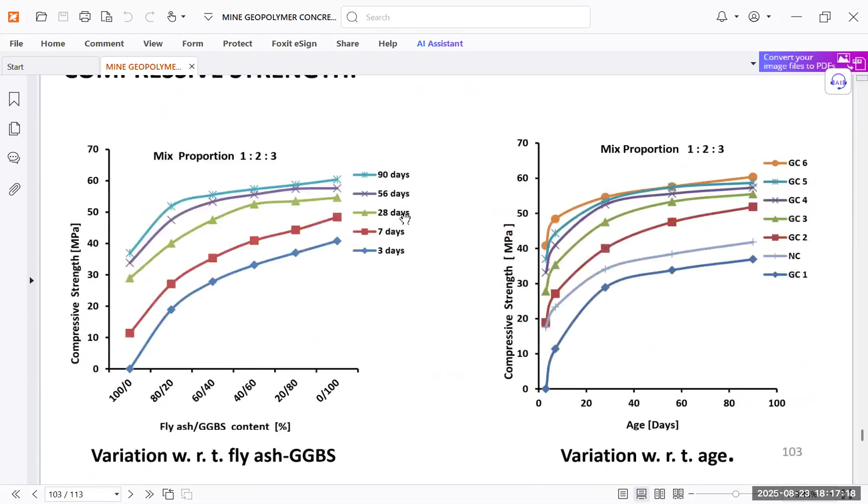Split tensile strength is also good with respect to normal concrete, so properties are as good as normal concrete, not much less in geopolymer concrete. This saves water, saves cement, reduces CO2 emission, but still gives results as good as required for different works. That is why we can go for geopolymer concrete to make construction eco-friendly and sustainable.

It is not fixed that only a certain result can be obtained. As per requirement, we can vary the geopolymer concrete using molarity variations and by varying the fluid to binder ratio, which makes a difference in strength output. This achieves the required strength as per tailoring property, which is very important in concrete. That is why concrete is popular, because we can tailor its properties, and this tailoring property is also there in geopolymer concrete, making sustainable construction with required strength.

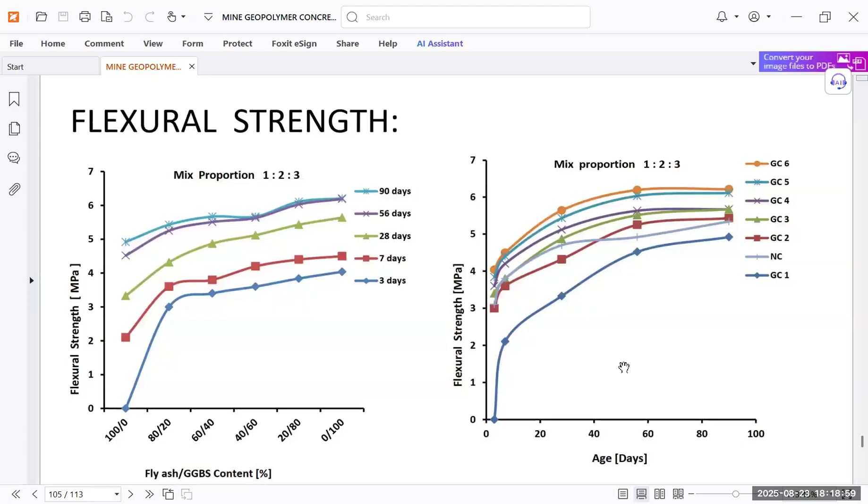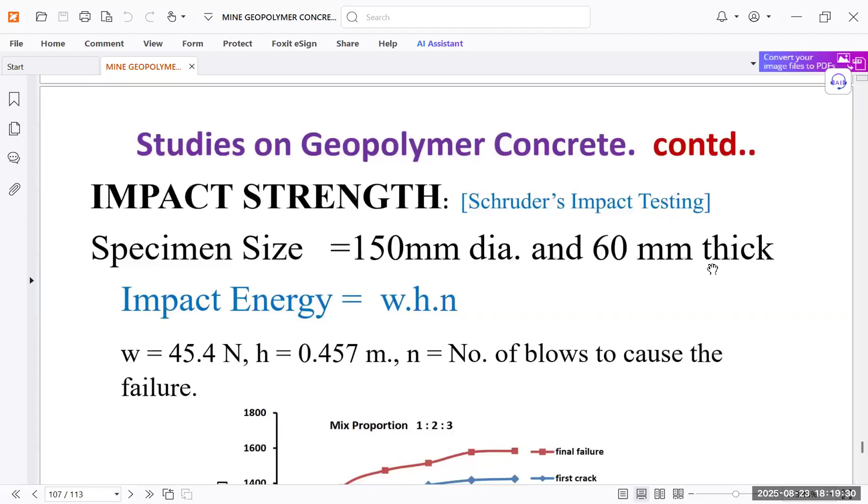Impact strength has also been used, tested with the Schruder's impact testing. Specimen size was 150 diameter and 60 thick. Impact energy was taken with W as 45.4 and H as 0.45. Number of blows to cause failure was checked. Fly ash to GGBS content was varied as 100:0, 80:20, and 0:100. For the next proportion, the final failure is shown like this, and the impact energy and first crack are also shown and have been checked.

Pull-out strength test was also carried out for geopolymer concrete. We changed the mix proportion, taking geopolymer concrete specimen 1 and specimen 2. Pull-out strength was measured as bond stress with respect to slip, showing the relationship between the two for specimen 1 and specimen 2, which has also been checked.

By varying the fly ash to GGBS ratio from 90:10 to different proportions, and making different geopolymer concrete contents, we can change the pull-out strength also. A typical stress strain curve has been obtained, a normalized stress strain curve for geopolymer concrete for different ages, which can be plotted using a regression model. Here we have taken molarity 10.

For different molarity you can get different molarity and fly ash to GGBS ratio of 70 to 30, and fluid to binder ratio is 0.65, sodium silicate to sodium hydroxide ratio is 2 to 1. For this we have made a strain curve. You can see it is similar to the concrete part. So by this we can see it is also getting the required results as per normal concrete, and the behavior is similar to that.

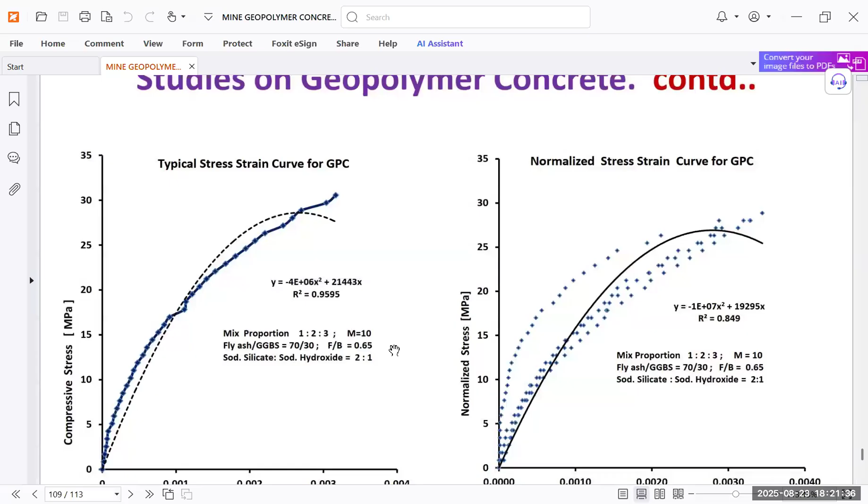But we are making this without using cement and without using water. That is the main concern, and that is why it is a solution for sustainable construction. It is important for our future generation because we are saving the environment without using water and without using cement. CO2 emission is also less and water usage is also less. That is why we are getting the required curves as per the requirement of our field.

So in the end we can compare this: conventional concrete versus geopolymer concrete. Strength in conventional concrete comes from hydration, but in geopolymer concrete, strength comes from geopolymerization plus hydration. Cement is the binder in normal concrete, whereas fly ash and GGBS are the binders in geopolymer concrete. Water curing is there in conventional concrete, while thermal curing is there in geopolymer, using only fly ash. Water is used for mixing in conventional concrete, and alkali solution is used in geopolymer concrete.

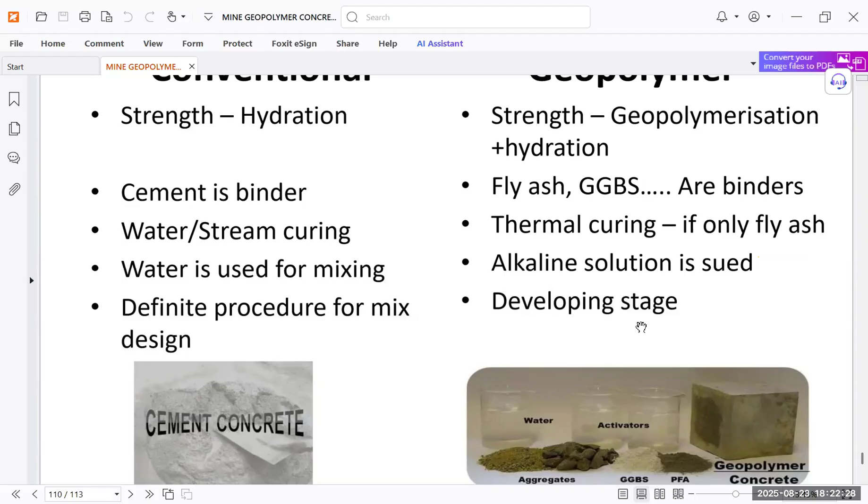There is no definite procedure or fixed IS code for mix design of geopolymer concrete yet, as I told you there is no geopolymer code, but it is in draft mode right now. It will be made soon. In cement concrete we use water plus aggregates, whereas in geopolymer concrete we use activators, aggregates, GGBS, and fly ash products. So that is in the developing stage; its code will soon be in draft mode and coming in the later part.

The concluding remarks are that geopolymers can be developed in line with Portland cement products also. High compressive strength and durability make it more used for special applications like the precast industry, fast grouting, high early strength machinery units, and lining of furnaces. These are the special applications. Geopolymer concrete satisfies slump, compressive strength, split tensile strength, impact strength, and shear strength requirements.

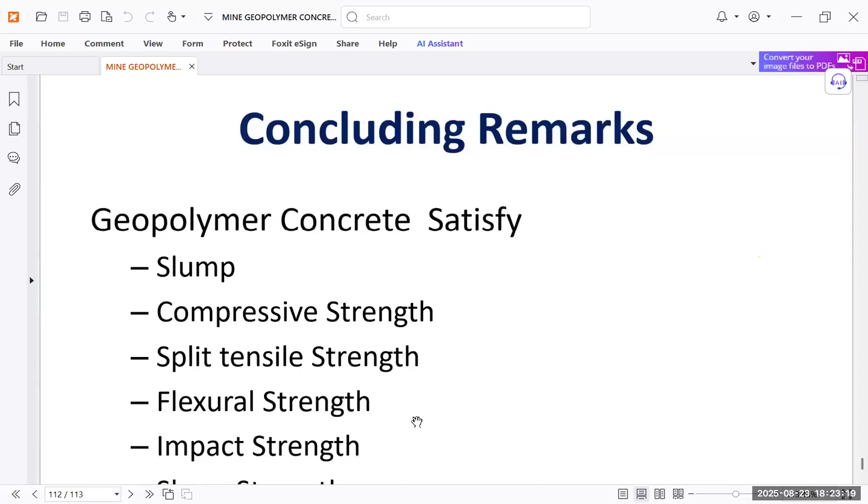So all this without OPC and curing. The GPC concretes are satisfying the slump requirement, compressive strength, and split tensile strength as we have seen in the graphs. It is satisfying all the tests without using OPC and curing. That is very important. We are not emitting CO2 in this case, and we are not using water for curing. That is why we are meeting the requirements at the site without using sources that are not available in the environment or that produce pollution.

That is why the sustainable construction requirement is met in the case of geopolymer concrete. That is why it is nowadays part of research, and many people are doing research so that its code is also being formed. Nowadays a draft has been made for geopolymer concrete for roads, but for buildings also it will soon be coming, because lots of trials are there so it gets certified by different sectors that it is okay for field people.

Because we know some expertise is required in making these solutions, it is not friendly for all people; common people cannot use it. That is why expertise has to be there to make this geopolymer concrete. That is the reason geopolymer concrete is still not very much used in the field, because expert people are required. So we have to use expertise and make our codes more popular.